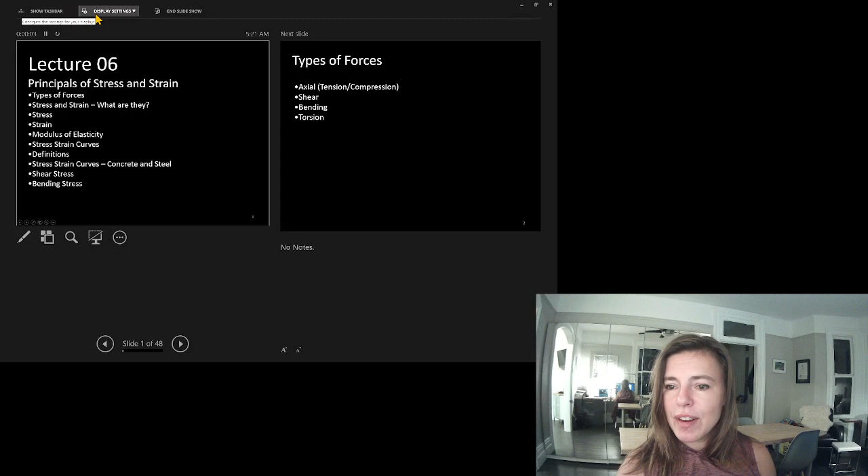Okay, so here is our lecture for today. It's the principles of stress and strain. I used to hate teaching this particular lecture. I always really struggled with trying to communicate these concepts, but over the years, it's turned into one of my favorite lectures to give, mostly because, especially when I gave it in person, I found the students really engaged. This is one that, in some ways, is the most intuitive and least intuitive simultaneously.

I'm also going to warn you that it is 5 a.m. and my kids hopefully stay asleep throughout the recording of this lecture. Because I still have to be in the city on Thursdays. I basically have to double down on my time. So my whole Thursday is still in the city being there, but I have to pre-record the lectures.

Okay, so today we're going to give a quick refresher on the types of forces, and then I'm going to introduce stress and strain to you. Like I said, in some ways they're very intuitive, and in some ways people struggle with them. So some of it is going to be me trying to find ways to talk about these issues and relate them to things that you do intuitively understand in your life, because you work with and experience stress and strain all the time. And in fact, they're terms that end up in the everyday lexicon that you don't even really realize are talking about these exact principles.

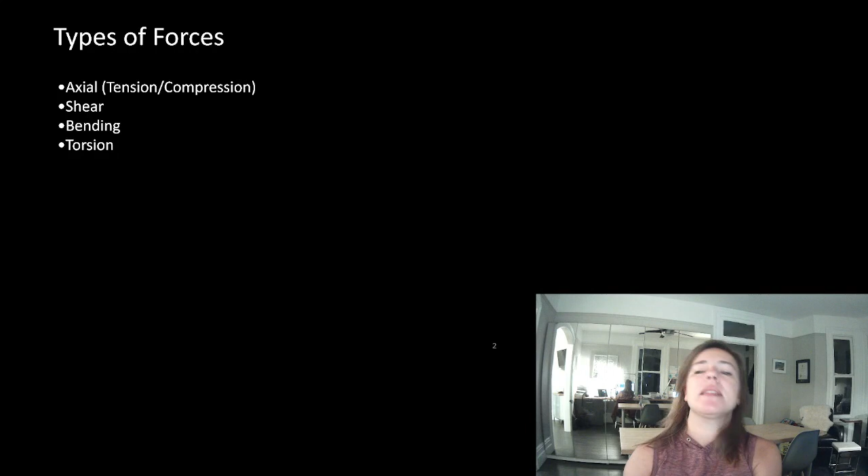Okay, let's, like we do often, refresh quickly the types of forces that we have. Remember, axial is compression, where we squish, and I'm showing you the little lines on my foam block, and then tension is where we pull. Tension is kind of hard to do with a foam block. It's maybe better with a hair elastic. We can stretch it out.

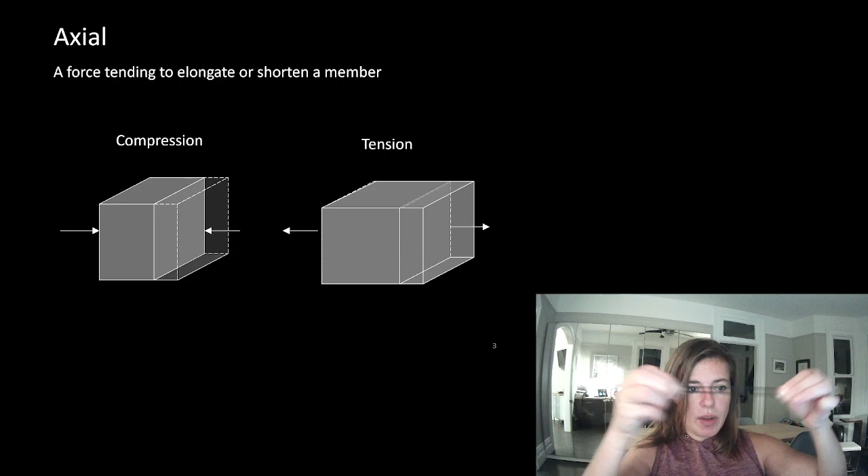Shear is the force acting in a direction parallel to a surface or a planar cross section of a body. Basically, if we have two planes and we slip them by each other, it's what's happening at that interface as we slip past each other right there.

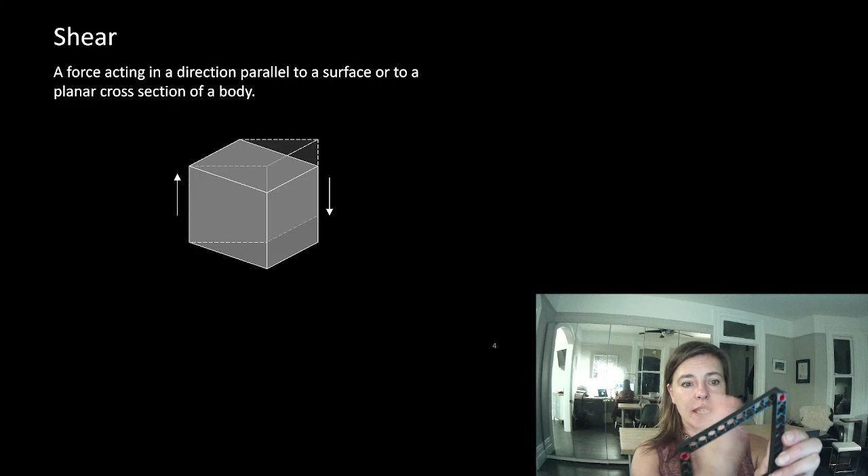If those two planes are far enough apart from each other, when we shift them relative to each other, we get a racking effect happening. Basically what we're saying is there's a series of infinite planes in between those two. As you can see, if we shear two planes far enough apart from each other, look at that—there's some force and some distance relative to each other. So as much as there's shear between these things, it's shifting relative to each other.

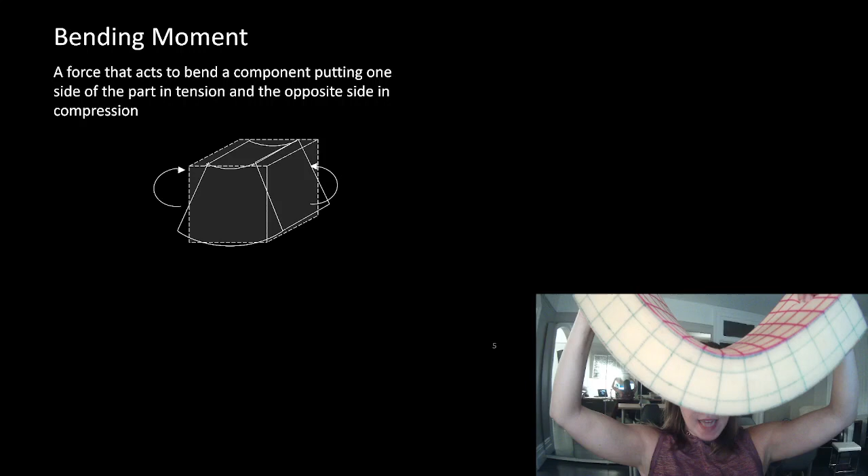Bending moment: when we bend something, it's putting one side in compression and one side in tension. You can see the top is kind of squishing there and the bottom is stretching.

If I bend it in the opposite direction, the top is stretching, which is tension, and the bottom is squishing, which is compression. So it seems like a lot of things, or at least bending, which we found quite complicated, can be related back to tension and compression.

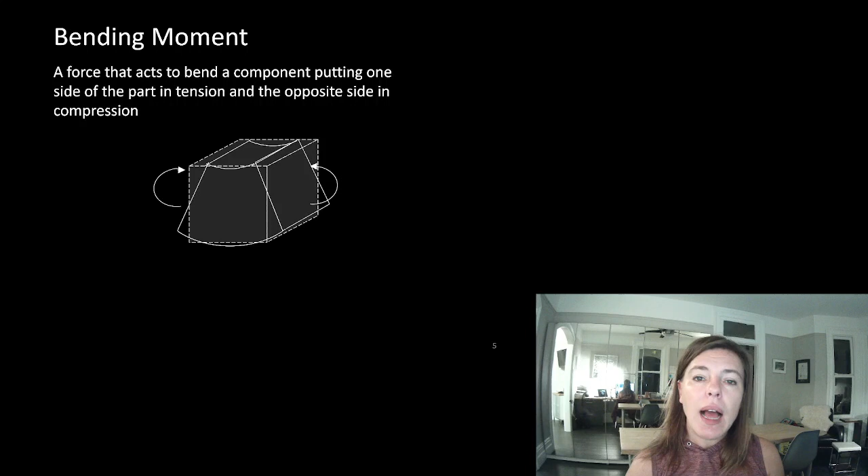Remember, we saw that when we talked about trusses. A truss and a beam, both of them could be in bending. For an element, a beam, we talked about that internal bending force. But for a truss, we broke it out into tension and compression components in the top and bottom chord of our truss.

Torsion, the one we don't really talk about very much, is the act of twisting, and it's kind of a funny combination of shear and moment. We're not going to spend any time going over that in this course. Okay, let's do a quick refresher on our units.

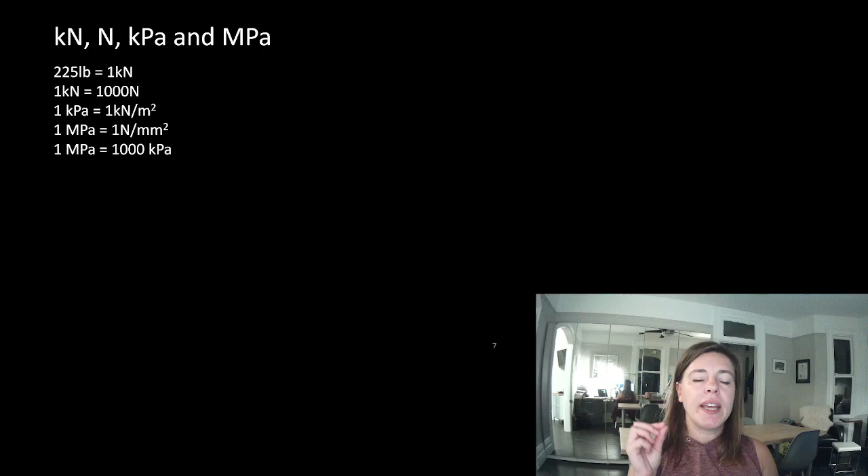So we talked about how 225 pounds is 1 kilonewton. For those of you that work in pounds, you can now get a sense of what 1 kilonewton is. 1 kilonewton is 1,000 newtons. Earlier in the term, we were always working in kilonewtons and meters. A lot of what we do today, we're going to work in newtons and millimeters. So instead of kilonewtons and meters, we're going to be working in newtons and millimeters. So we're going to need to be able to convert back and forth. Luckily, we have the beautiful metric system where everything is about multiplication or division of 1,000.

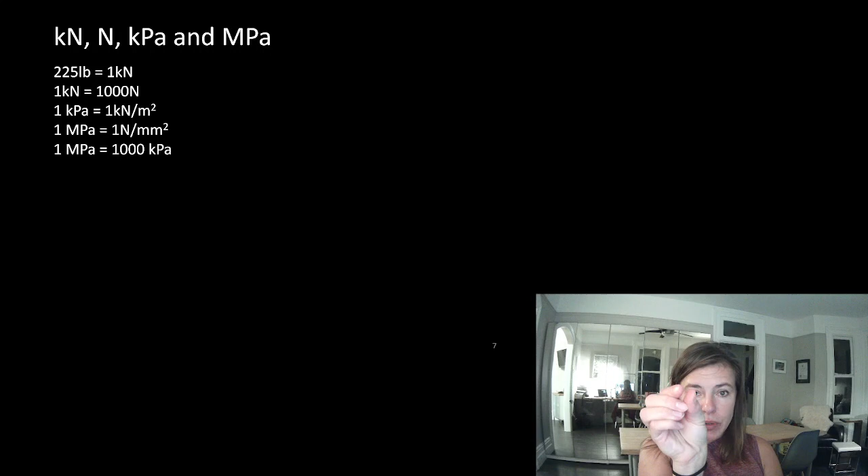1 kPa was 1 kilonewton per meter squared. So basically, for every 1 meter by 1 meter area, we had 1 kilonewton of force acting on it. MPa is 1 newton per millimeter squared. So every 1 millimeter by 1 millimeter square has 1 newton on it. So that means MPa and kPa can be related. If we wanted to switch from MPa to kPa, for 1 MPa we are dividing by 1,000 to switch newtons to kilonewtons, but then multiplying by 1,000 and 1,000 to switch to meters squared. So 1 MPa is the same as 1,000 kPa.

Strength. You guys remember, this is what we spent the first few lectures talking about. We want to make sure that the factored load is less than the reduced capacity. And we say less than, but that less than can be pretty darn close to exactly equal. So we'll often say equal is the same as less than.

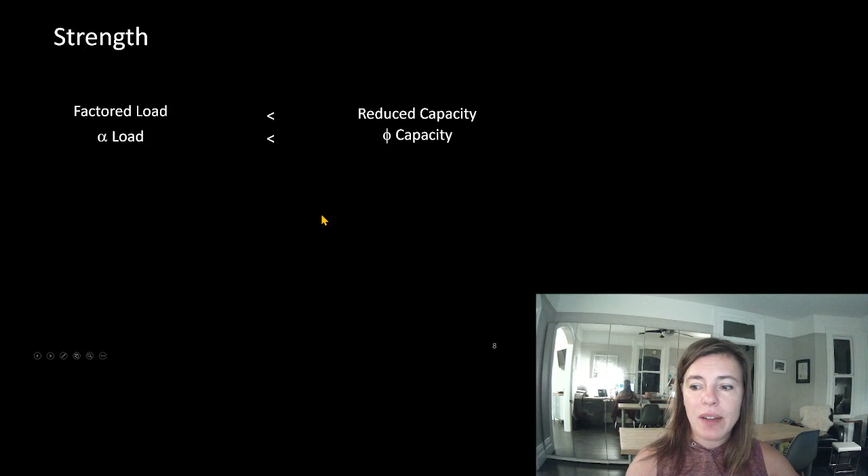We'll often use these symbols to represent the fact that we factored the load or reduced the capacity. We haven't really looked at it much when we were factoring it. If you remember, I had that chart showing what the different factors were. In the building code, they used this symbol to talk about what the factors were. In this part of the course, where we spend time talking about the reduced capacity, this little symbol is going to be important to us. We're going to look for this symbol to see how much we reduce the capacity of different materials.

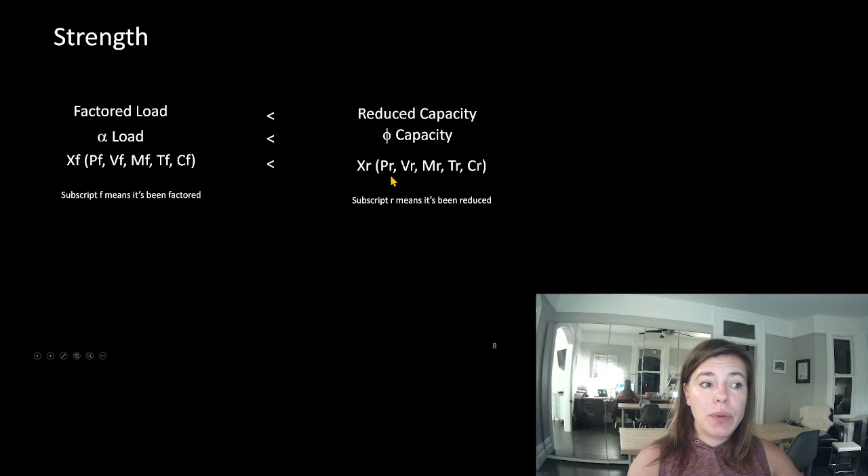When we were talking about the actual forces, we would use a little subscript F to remind ourselves that we were talking about a factored load. So if you came to me and said, here's the load, if it didn't have the subscript F, I would know I needed to factor it. If it had the little subscript F, I would know you've already factored it. And that happens a lot. A lot of times in offices, people will do one part of the problem or figure out the loads for the whole building and then pass it on to another person. So knowing if that little subscript F has already been applied is very important. The little subscript R means that the capacity has been reduced. And again, it's the same thing - has that already been incorporated?

Okay, here's where we start talking about the new part of the term.

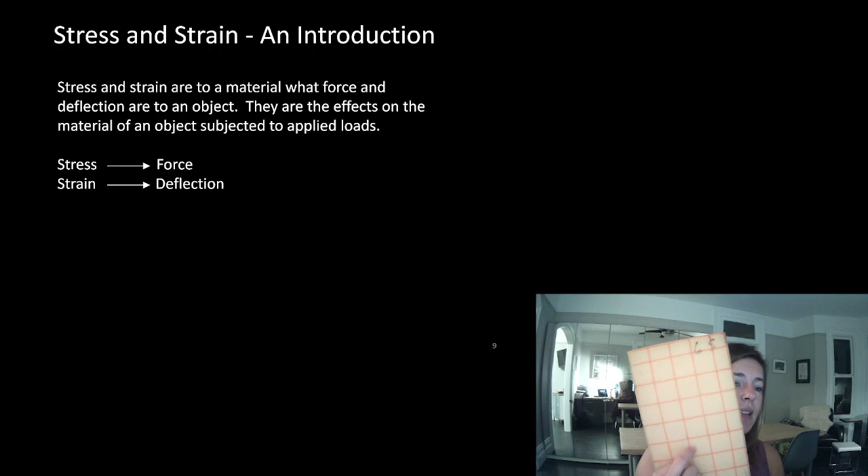Stress and strain. So stress and strain are to the material what force and deflection are to an object. They are the effects on the material of an object subject to applied loads. What does that mean? If this was our object, we were applying a force to it. And now I want to talk about what happens to one tiny little block of it. So we applied a force, it deflected, so we had a force with a deflection, and now we're going to talk about what that means for stress and strain on this little cube of that object that has the force with a deflection on it.

So it's easiest to work with axial forces, so we're going to start there. So stress versus force - if we have an object with force on it, we are talking about one unit area of material with stress on it. So we were talking about objects. Now we're going to break it out and just talk about this little tiny block of the material. Basically, forget about the object as a whole - what does it do to the little tiny basic bit of element? So if there's force on the object, we're talking about the stress in the material.

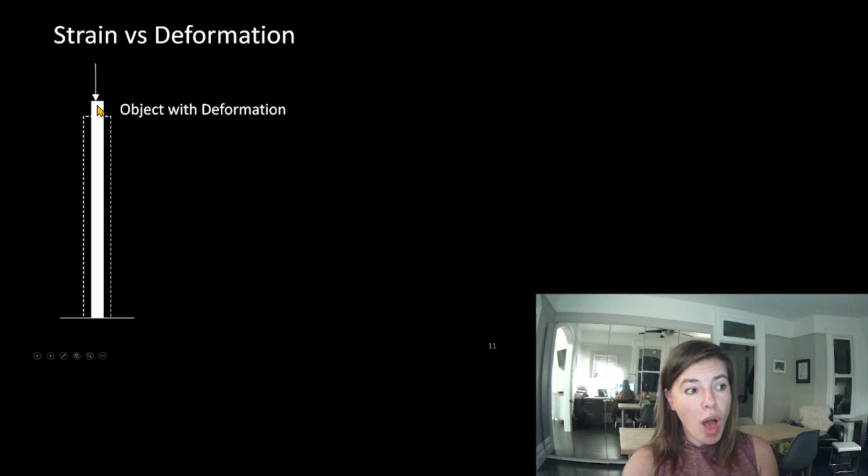If we're talking about an object with deformation, forget that there is a force causing that deformation. We know there must be a force there, but that's kind of irrelevant to us at the moment. We have an object with deformation. We're talking about the strain on the material object. So if you hear deformation, think strain. If you hear force, think stress.

Now you can see though that this deformation is caused by a force. So there's probably gonna be some way to equate those two things. And that's gonna come later in the term.

Okay, let's talk about stress. Stress is defined as force per unit area. You're gonna see it's very similar to the load we applied to things because that was a force over an area. Remember when we were talking about kPa and we had 1 kilonewton over 1 meter by 1 meter squared, that was 1 kPa, or we had a force divided by an area.

Well, that was our overall object, and we talked about things a lot in kPa. We're now going to be talking about the unit material object, or a tiny little object. And so we're going to refer to it in newtons and millimeters squared. But we're still talking about a force and an area. So if we have that force over a particular area, we can determine the stress.

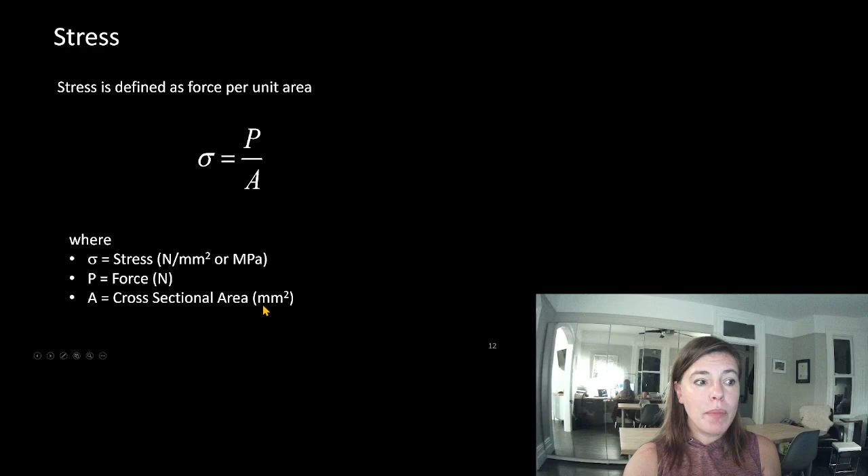So stress, we want it to be in newtons per millimeter squared, or MPa. That means our force needs to be in newtons. Remember, we had things in kilonewtons when we were talking about our force. So we would want that to be 1,000 newtons instead of 1 kilonewton. And our cross-sectional area, instead of 1 meter by 1 meter squared, we would be talking about 1,000 times 1,000 millimeters squared instead.

So let's see what that looks like as an illustration. If we have this area with this force P on it, it is the same thing as that force spread evenly all over that area, or force divided by area. You know how I've often talked about my load as if I was spread evenly over the table. Well, what we were really talking about is a force spread over an area. So this is P divided by A. So this is our stress.

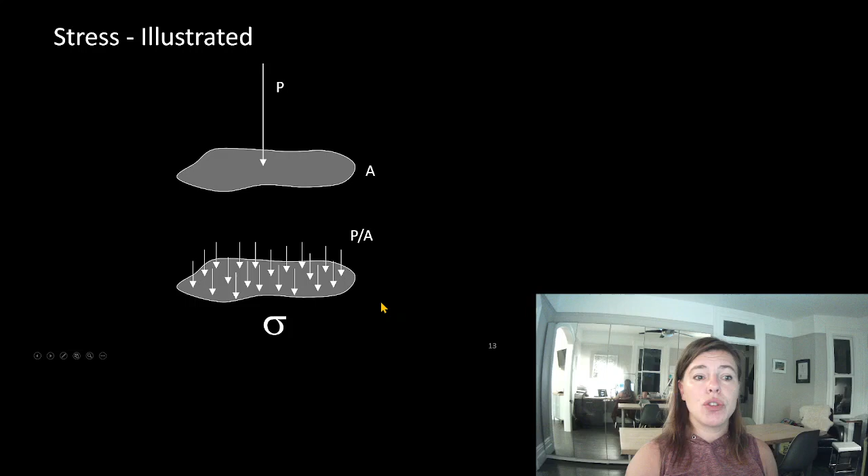Okay, so let's take that one and set it aside. Is there more or less or the same stress if we have the same force over a smaller area? People tend to get very nervous when we're talking about stress and strain, but you still do intuitively understand this thing. If you have your entire weight on both feet, you have a certain amount of stress you're exerting on the floor. What if you lifted 1 foot up? So you cut your area in half. Does the stress you exert now on that area below 1 foot, do you think that's more or less than the stress of both feet? Try it. Stand up. I'm going to try it myself.

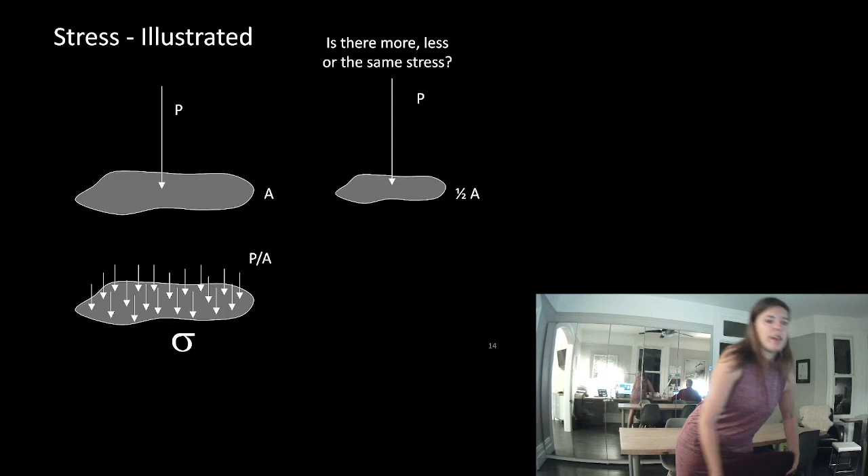I'm going to stand up, and you can't see my feet, but I've got all of my load spread over 2 feet. When I lift 1 foot up, if I was standing on a mattress, for example, I would sink down just a little bit lower. Sink down, that sounds a bit like deformation and strain, but we just want to talk about force. It's a good indication that I have more stress in that spot. So yes, for those of you who said there should be more stress here, let's take a look. We have the same force divided by half the area. Well, that's 2 times the stress, or we've doubled the stress. So again, just try to take a second and intuitively think about these things before you start your calculations.

Okay, we have our force divided by our area, and we have stress. Is there more or less or the same stress if we have half the load on half the area? Well, if we only took half of our weight and put it on 1 foot, that should be fairly similar to our whole weight over on 2 different feet. So for those of you that think this is the same, let's take a look. We have half the force divided by half the area. The halves cancel out. We have the same stress. So this is why stress is really handy, because we can break it down into unit components so easily. We can talk about what's happening at the material level very easily. So these are equal to each other.

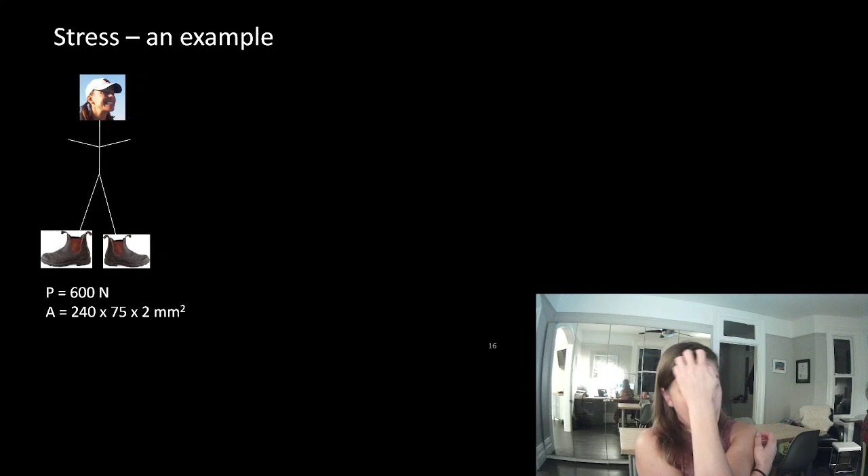So let's take a quick look at an example. Here I am. I weigh 600 newtons, and I've measured the area of the bottom of my Blundstones: 240 millimeters long by 75 millimeters wide, almost 10 inches by about 3 inches. And I've got 2 feet. So that 600 newtons is, remember, stress is force divided by area.

So my stress on the ground, let's take a look: 600 divided by 240 times 75 times 2. Plugged in there, that equals 0.0167 MPa. All right, so that gives us some information.

We have zero clue of the scale of what that means yet. Loads we could kind of get our head around, but stress is less intuitive. This gives us a number but no intuitive feeling. Remember, newtons and kilonewtons, MPa and kPa, just differ by 1,000 units. So if this was kPa, it'd be 1, 2, 3 - I'd be exerting 16.7 kPa of stress on the ground directly under my feet.

Now, if I went and put heels on - I'm feeling fancy, so I've taken off my Blundstones and put on a pair of heels - do you intuitively think there is more or less stress exerted on the ground?

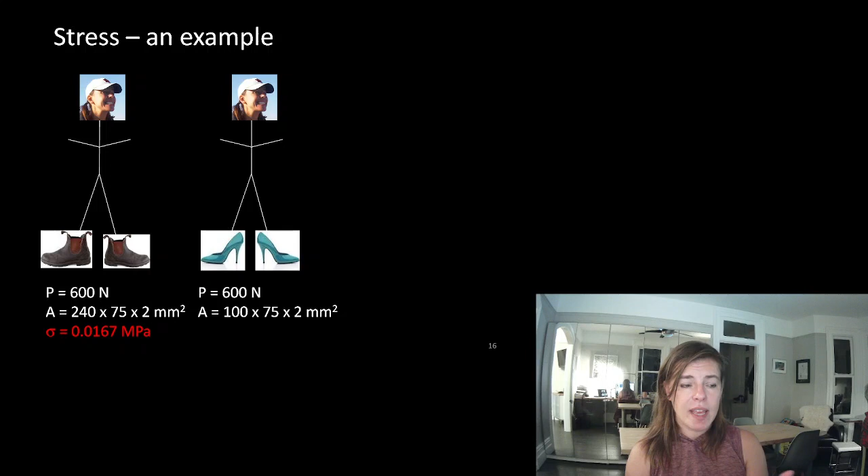Now, I'm going to assume that most of the load is on the front part of my heels. For any of you who have worn heels at a wedding or prom and tried to walk across grass, you try to stay on your toes, because if you put your weight on your heel, you go right through the grass. That's because there's a lower area there, and you're putting more stress on it, or the same force on a smaller area.

So if I have just my weight on the toes of my heels, just this part right here, let's take a look - do you think there is more or less stress exerted on the ground? Well, we have 600 newtons. My weight hasn't changed, but I've got a smaller surface area now. So we've got 600 divided by 100 times 75 times 2. We're going to get 0.04 MPa of stress, a higher stress. And that makes sense - we've got a smaller surface area but the same load.

Now I go and grab my snowshoes instead of my Blundstones or my heels. I've got 600 newtons, the same load, over a much larger surface area. My snowshoes are 1 meter by 150 millimeters wide. So now, intuitively, what do you think - more or less stress? Probably you understand there should be much less surface stress between my feet and the ground now. And that's exactly why we use snowshoes, because snow can handle a much lower stress.

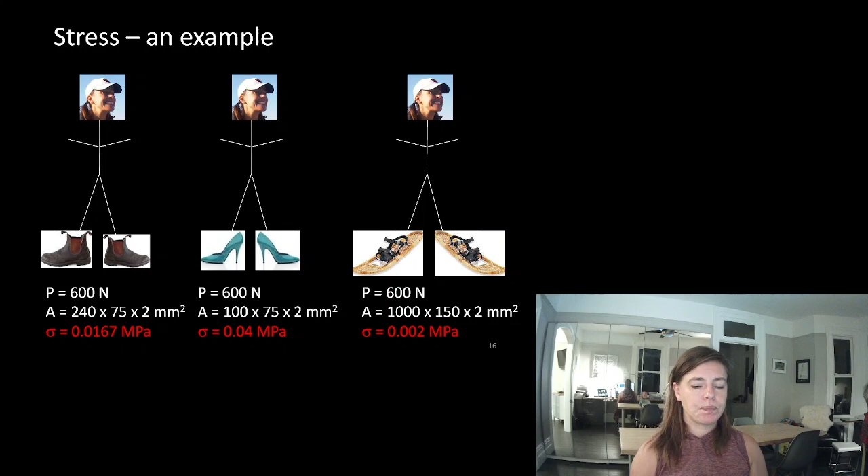All right, let's do another example. What is the stress an elephant exerts on a floor if it weighs 44 kilonewtons and its feet are approximately 500 millimeters in diameter? I don't think I'm going to put the calculation sheet down for this - I think this one's pretty easy. We can talk it through.

Well, we know we want to switch those kilonewtons into newtons. When we're talking about stress, we want to be in newtons and millimeters. So 44 times 1,000 equals 44,000 newtons. Okay? For area, we have 4 feet of our elephant.

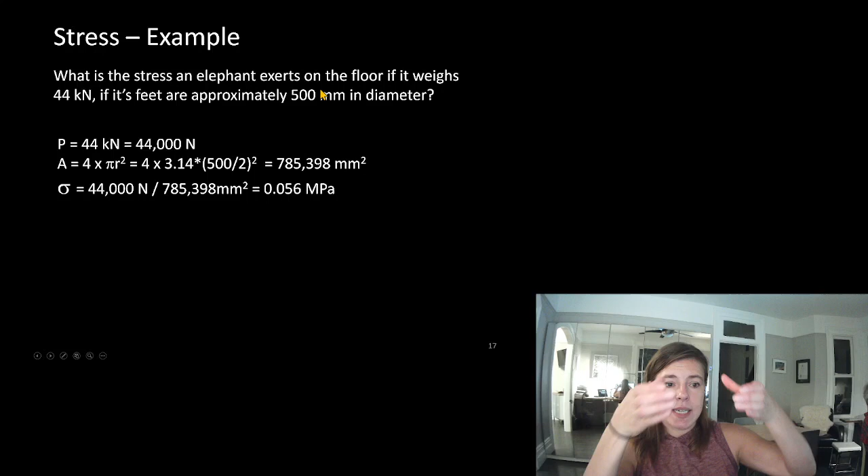Its feet are approximately half a meter around in diameter, or 4 feet times pi r squared. Our r is 500 divided by 2. Remember, r is radius, which is half of the diameter. So it's 4 times 3.14 times 500 divided by 2, squared.

We get 785,398 millimeters squared. So we have a force and an area in newtons and millimeters squared. We can calculate the stress the elephant exerts on the floor: 44,000 newtons divided by 785,398 millimeters squared, and we get 0.056 MPa.

Me in heels was 0.04 MPa. So I exert the same stress as an elephant? That seems kind of insulting to me. But this is why understanding what the area is is very important. You want to be talking about the same thing here to understand what stress means.

What if the elephant snuck into my closet and stole 2 pairs of heels? So instead of its load being on 500 millimeters in diameter on all 4 feet, it tried to jam each foot into my heels. So that sneaky elephant is now wearing my best pair of heels and my second best pair of heels. Let's see what that is. It's got 4 feet, and my heels were 100 by 75, so we have 100 times 75 times 4 feet, so we have 30,000 millimeters squared.

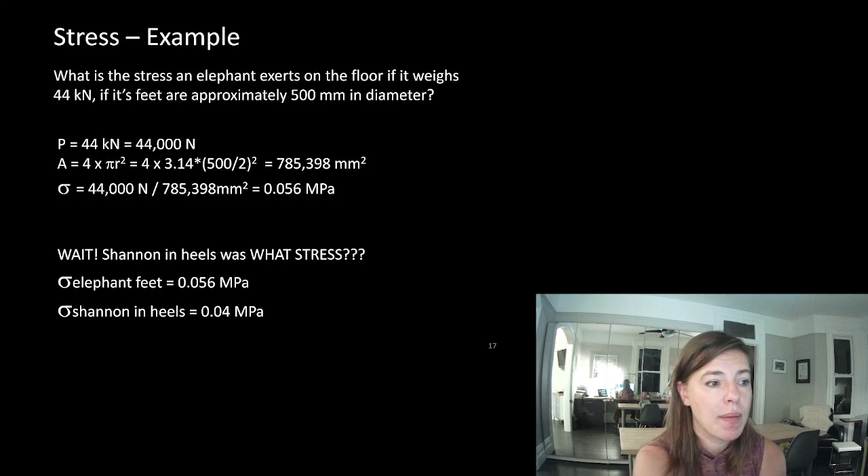Well, let's relate this to something that's slightly more handy for talking about buildings. What if I said steel can support around 350 MPa of stress? You don't know where that came from, you don't know what that means. But if I said that snow can exert...

0.01 MPa of stress, and that's why we needed the snowshoes, you kind of get what I'm talking about. So I'm just flat out telling you we're talking about a material that happens to be steel that can support 350 MPa of stress. It has the ability to not fail if it's supporting anything up to 350 MPa of stress. Over that, it's ruined. We don't know what that means or where it came from, but I'm telling you this is the material we're talking about right now.

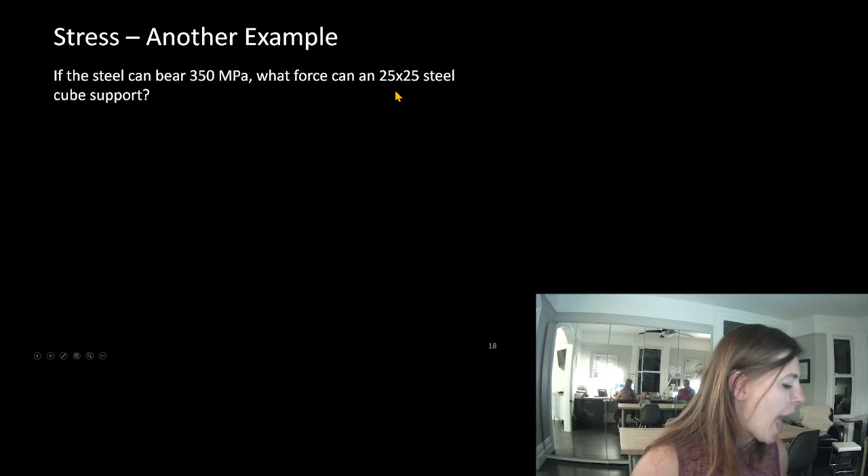And we have a 1 inch by 1 inch cube of it, so we have 25 by 25 millimeters of steel. I am going to add the fact that it's supposed to be millimeters into that slide, slide 18. I'm going to add in the millimeters into that note, just so you guys are really seeing that we're talking about a 25 millimeter by 25 millimeter cube.

Okay, we want to know what force it can take, though. We've been told what the stress capacity is: it's 350 MPa. Area, no problem, we can figure that out. It's 25 by 25 millimeters, or 625 millimeters squared.

We know that stress equals force divided by area. Now it's a simple matter of rearranging this. We can take our stress and multiply it by area to figure out what force that can take. So 350 times 625 millimeters squared gives us 218,750 newtons.

Well, great, we were dealing with stress, so we wanted everything in newtons and millimeters. But once we're talking about force again, we're kind of lazy and we like to talk about things in kilonewtons. So now we're going to switch it back to kilonewtons. I know, it is so hard to multiply and divide by 1,000, but that's exactly what we're going to do. We're going to divide this by 1,000 to talk about it in kilonewtons, and we can see that we have 218.7 kilonewtons. So a 1 inch by 1 inch cube of steel can support 218.7 kilonewtons, assuming it can take 350 MPa of stress.

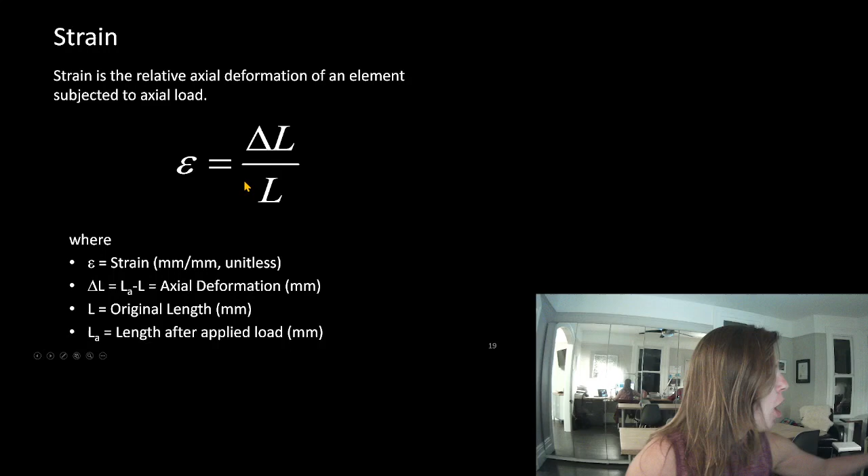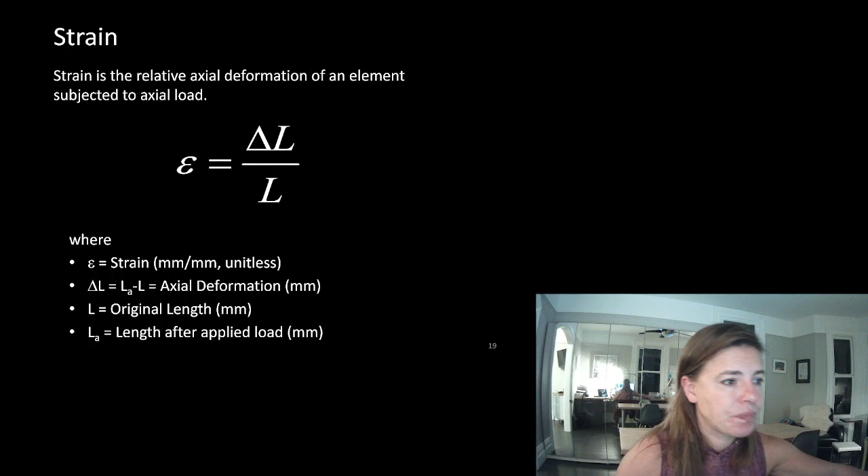So strain is a dimension divided by a dimension. It's unitless, which really messes with people's heads. I find it's often handy when I'm talking about strain to just remind myself where I'm coming from. Even though it's unitless, it's millimeters divided by millimeters, I'll often find it handy to just keep track of my units off to the side, and I'll write millimeters divided by millimeters just so I don't lose track of things. It can be very handy.

So we also want to know what the change in length is. That is the length after the load's been applied minus the original length. And that is our axial deformation. So this is how much has it changed? We have the final length minus the original length. Or really, it's the final length minus the original length divided by the original length.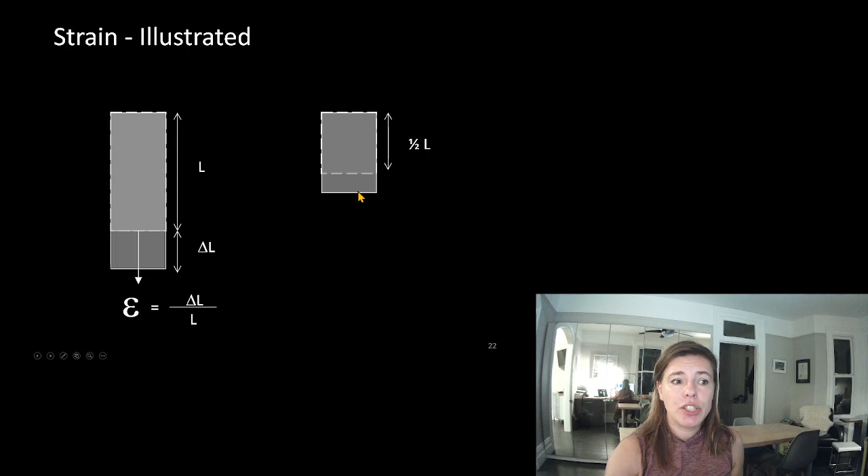Let's look at another one. We have half the original length, but only half of the amount of deformation. So half of the change in length, but we have half of the original length. We're going to have the same amount of strain.

Let's look at an example.

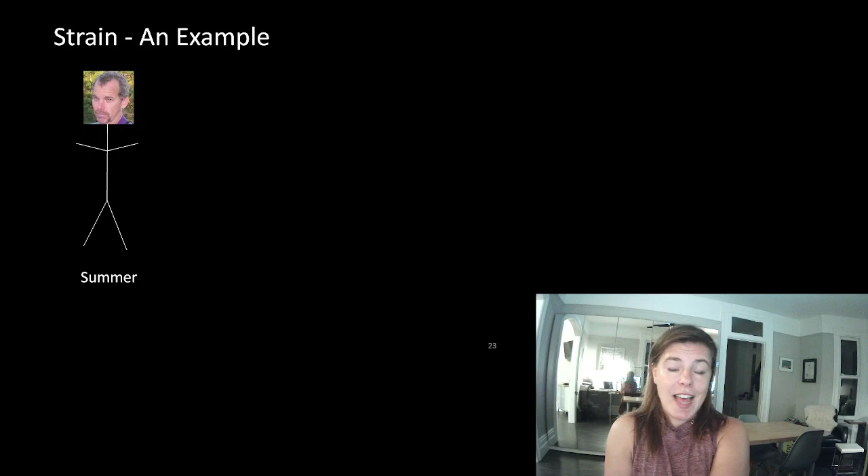Here's Dave. Say hi, Dave. This is much more fun for me now that he's sitting beside me. Usually this was done and people hadn't met him yet. Here's Dave one time with a fantastic mustache. And it was in the summer. And Dave was fit. Dave was in great shape. He had been working out. He had been lifting lots of heavy things outside.

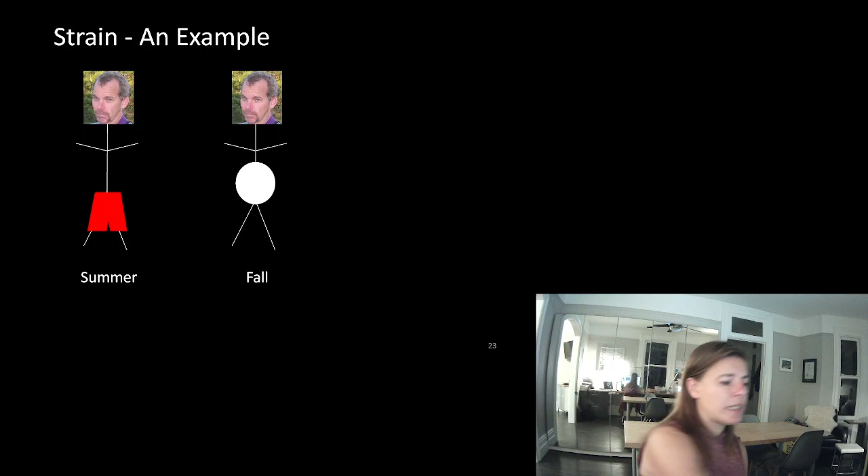And he puts on his shorts, and the elastic fits perfectly around his waist. It's exactly the right fit. He needs absolutely nothing to hold those shorts up. So his shorts are the exact perfect fit. But fall comes along. There's lots of events, Halloween candy, so much Halloween candy. That reminds me, I'm going to take a drink of my coffee. And those shorts are starting to get a little bit snug. So he pulls his shorts up, and that elastic is stretching just a little bit. So there's a little bit of stretch in that elastic around his shorts.

And then January. Whew, after the holidays, lots of beer, lots of turkey, lots of eggnog, lots of chocolate. And Dave goes to put on those same shorts, and man oh man, is he ever stretching or straining the elastic on those shorts. So this is where intuitively I think you understand. For all of these examples, when he's got the shorts in his hands just before he puts them on, they all have an original length. The original length is the exact same no matter what. That's the elastic band in his shorts.

In the summer, when he puts those shorts on, there is no change. There is no delta, so there is no strain at all. Zero strain on that elastic.

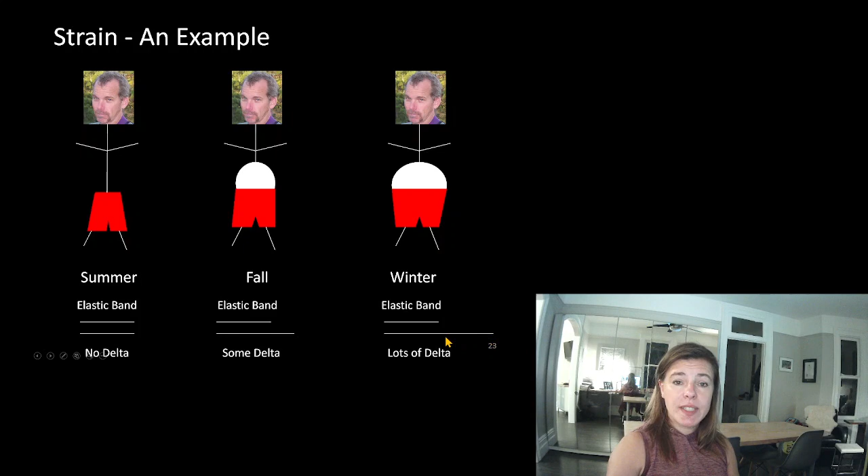In the fall, there's some delta, some stretch, some change in length, even though they all have the same original length. So there's some strain here. In the winter, there's lots of stretch in that elastic, lots of delta, so there's lots of strain in that elastic.

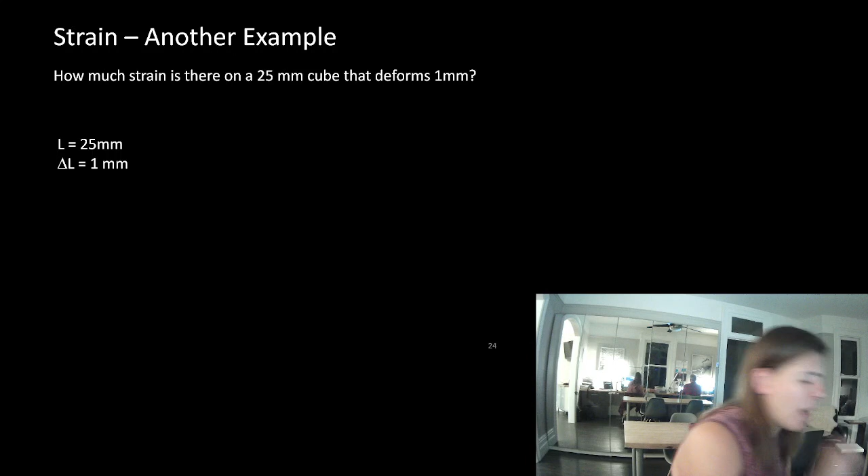Intuitively, I think now you kind of understand what we're talking about. We're going to bring it back to objects that maybe are a little bit harder to talk about. I'm trying to decide if I want to turn the page down for you guys. Okay, these are still pretty easy examples, I don't think I need to work out the calculations by hand.

So we have an object that is 25 millimeters tall, so we're talking about 1 inch tall. Remember how in the other one we had a surface area that was 25 by 25? Well, now I'm talking about one that is 25 millimeters tall. And we've been told it deforms 1 millimeter.

We don't know what load was put on it. We don't know what happened to do this, but we know that it was 25 millimeters tall and now it's changed by 1 millimeter. Now, some of you are asking, did it stretch or did it compress? Answer is, I don't know. They've just told us that it's 1 millimeter. I don't know what's happened there. They didn't give us that information. They've only told us that it deforms 1 millimeter.

So we have 25 millimeters of original length, and we have a change in length of 1 millimeter. So what's the strain? Strain is change in length divided by original length, and we have 1 millimeter divided by 25 millimeters, or 0.04. Unitless strain. Sometimes I'll write millimeters divided by millimeters just to kind of help myself keep track of that.

So why do we use the original length when we're talking about strain? Why don't we use the final length? Well, there's two reasons. One is that the difference is very, very tiny. But the other one is it makes it easier to not worry about whether it is stretching or compressing. All of a sudden, if it's stretching or compressing becomes really, really important.

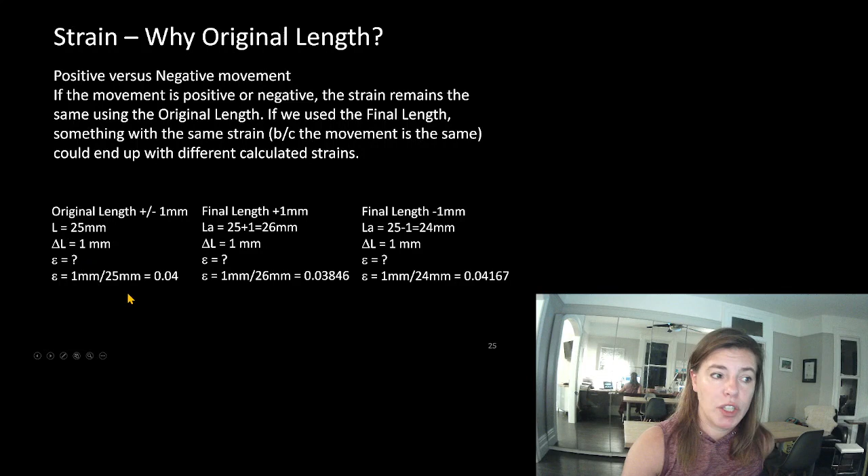All right, you understand all of this. You know what stress is, you know what strain is. Why do we care about this unit element? Why don't we just talk about it in force and deflection? Why the heck would we bother with this at a material level?

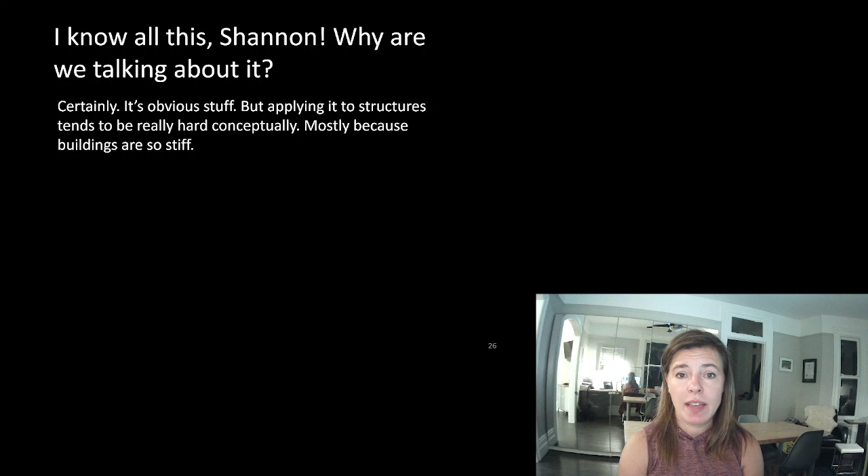We need a way to be able to talk about these things or do all of the tests to figure out how these things behave in a lab. We need to know how to figure this out in a lab and then extrapolate and apply it to a building as a whole. And that's why talking about things in stress and strain is so important, because now we can talk about things at a material level and then extrapolate it to the building as a whole.

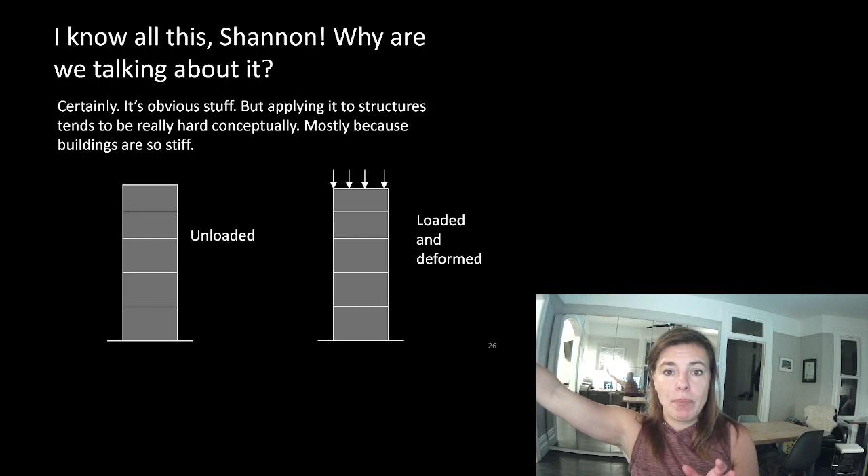So the part behaves like the whole. It's really hard to test full-scale elements. Knowing the part of it behaves like the whole, we only need to test these little tiny bits of it to understand the material. So often, for example, if it was steel, we'd test a coupon or a dog bone sample. If it was an axial load, we'd stretch this, measure the deformation, and measure when it failed. Then we could calculate what the stress and strain are, and extrapolate that and apply it to whatever members we actually have.

So what are the exceptions to this rule? These make sense most of the time. When do these rules stop making sense? Well, when we have phase changes, when we go directly from a solid to a gas or even some stage in between. So let's say an ice hotel evaporates, for example. That's sublimation. The normal rules are not applying in that example.

Extreme temperatures. Steel in a fire, for example, and steel is very susceptible to high heat. The normal rules we're about to start to talk about for steel don't apply. It is experiencing different rules, the rules are changing for how steel behaves under very high heat.

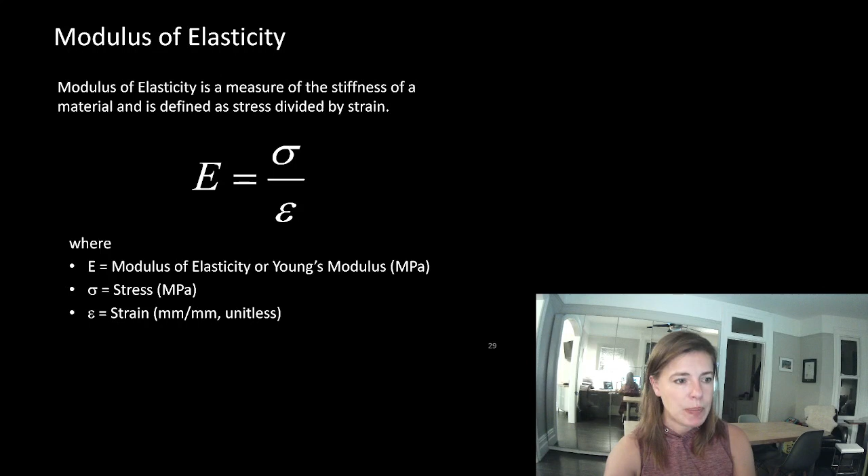So let's take a look. If we know that E, the modulus of elasticity, is just something we're creating to relate stress and strain, we have stress divided by strain. But if we know that stress is force divided by area and strain is delta L divided by L, we're just saying E is this measurement or value, stress divided by strain, we can figure out a bunch of things. E then would be stress divided by strain, or we can rework this and clean it up a little bit: E is force times length divided by change in length times area.

So all of a sudden, we have our force, we have our length, we have our change in length, and we have our area. So now there's this relationship between that unknown, what was causing that deformation for strain, related to our stress. And that relationship is E, our modulus of elasticity. We're going to see what that looks like - we're going to plot some of those out in just a minute.

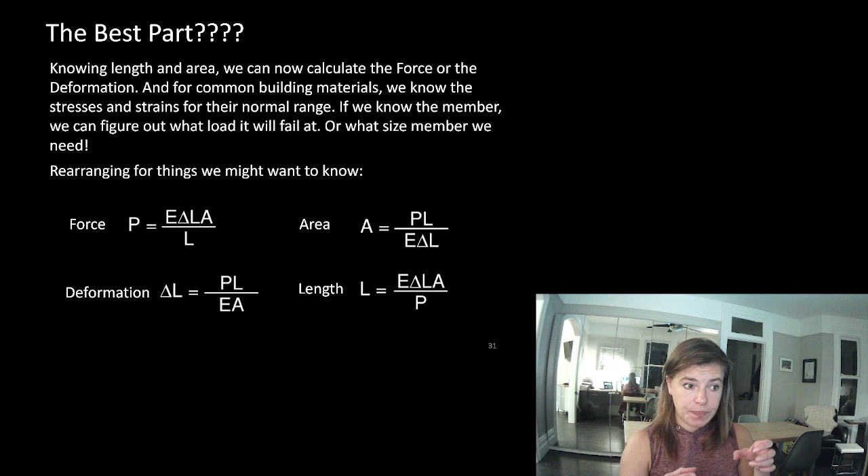If we know length and area, we can calculate the force or the deformation. For common building materials, we know the stresses and strains in their normal ranges. We can take coupons, dog bones, cylinders, or cubes of material and test them again and again to figure out what stresses or strains they fail at. If we know what member we have, what length we're using, what load is being applied, or the cross-sectional area of the material, we can figure out things about our material or member.

If we know the modulus of elasticity of our material, remember it can be figured out by testing small elements to determine the stress and strain on that material, which tells us how it behaves. So if we know E, how much deformation we're going to get, our cross-sectional area, and our length, we could figure out the force on this object. This might seem like a stretch until I show you this relationship. We'll start with a few quick examples, then look at that relationship to tie it all together.

We like talking about things in stress and strain because we can test it at a unit element. Stress divided by strain is MPa divided by a unitless element, so our E, or modulus of elasticity, is also in MPa.

People have, over the years, tested lots of elements, and we know their modulus of elasticity. Structural steel is 200,000 MPa - that's the only one I want you to memorize. You should know that steel has a modulus of elasticity of 200,000 MPa. If we were all in person, I'd make you say it aloud, and randomly ask for the rest of the term. I can guarantee you need to know this. Steel, E equals 200,000 MPa.

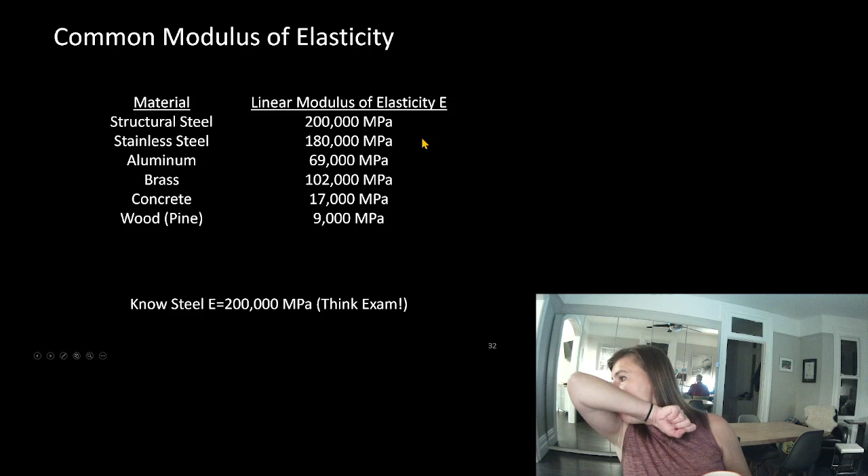Again, this doesn't mean much to you guys. What can we do with these things, Shannon? Well, let's start looking at some examples.

Let's take a look at our steel cube, 1 millimeter by 1 millimeter by 1 millimeter. That's a good size to talk about, but I use 25 millimeters because that's about an inch, and old school people talk in inches and pounds and pound force. We're going to work in everything metric, so we'll use a 25 millimeter by 25 millimeter by 25 millimeter cube.

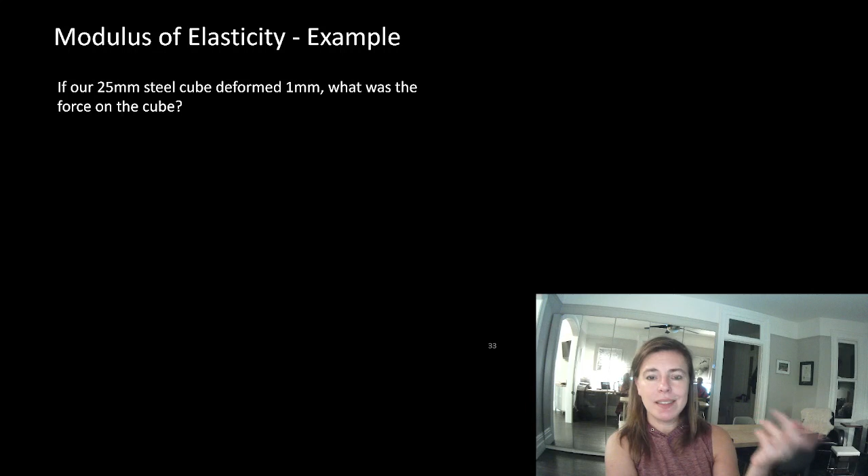We've been told this cube deforms 1 millimeter. What was the force on that cube? We know its original length was 25 millimeters - we don't care whether it's compression or tension, it's deforming 1 millimeter, so we know our change in length. We know our surface area was 25 by 25 millimeters, so 625 millimeters squared. And we know E because it's steel - somebody has tested this again and again and told us it's 200,000 MPa. The only thing we don't know is what the force was.

We know the original length was 25 millimeters, the change in length was 1 millimeter, the area is 25 by 25 or 625 millimeters squared, and E for steel is 200,000 MPa. Well, the force - E equals force times original length divided by... oh look at that, I've got an error in that slide too.

Slide 33. We're missing the delta L. That should be delta L times the area, or 200,000 equals P times 25, or original length, divided by our change in length times our area.

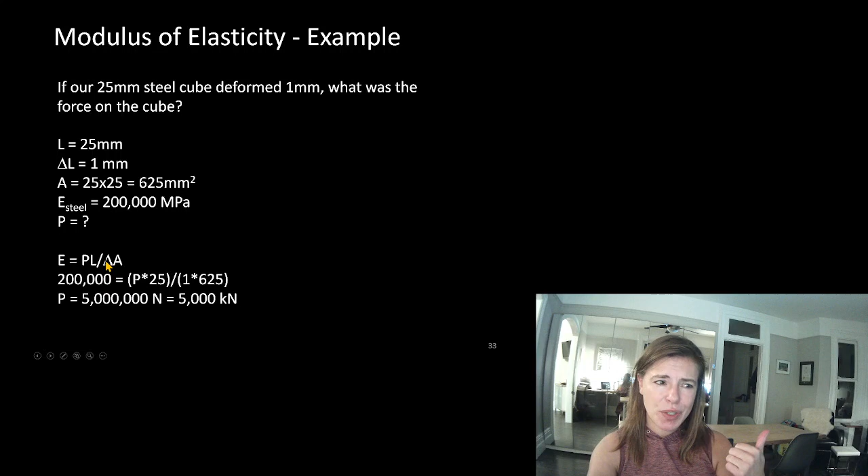We could rearrange this first. Remember I showed you those equations where we could actually rearrange this? I just wanted to show you that you could rearrange it with the numbers or after the numbers have been inserted. It doesn't matter what way you like to do it.

Our force is 5 million newtons? What the heck? That is huge. This is why once we're talking about the force, we like to switch it back into kilonewtons. I know, it's a pain in the butt that when we're talking about stress and strain, we work with MPa or newtons and millimeters, and then once we're talking about the final thing, we're working in kilonewtons and meters. So we're going to switch this into kilonewtons, a slightly more reasonable number of 5,000 kilonewtons.

But that's still 5,000 Arnolds. So we have this object that has 5,000 kilonewtons on it, causing that 1 millimeter of deformation. Now, how many kilonewtons did we say that 25 millimeter by 25 millimeter cube of steel could take? Yeah, it was only 218 kilonewtons, I think. So it looks like this would actually fail that object.

It doesn't seem like if we knew how much stress a steel object could actually take, that this could even be possible. But that seems a bit beyond what we're talking about right now. We don't really know where that comes from, but I'm telling you that this couldn't work because we already did a calculation that if steel can only take 350 MPa, we couldn't get this much deformation.

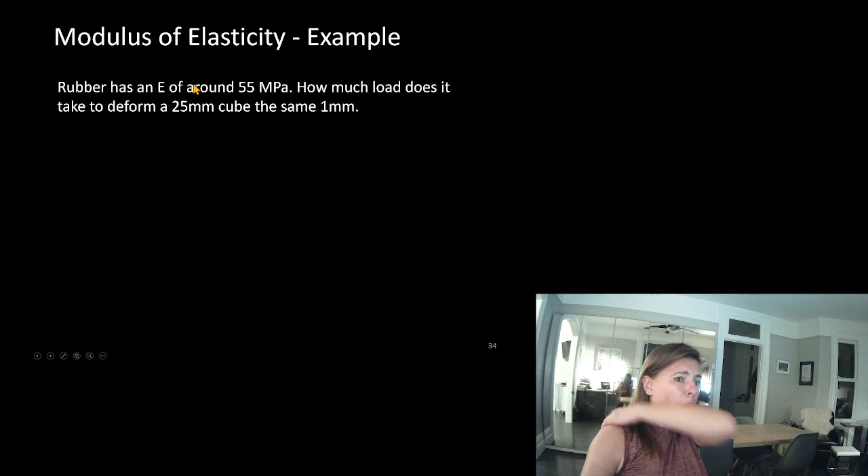All right. What if we had rubber, which has an E of 55 MPa? And I can tell you everything that I've talked about in this lecture, I've actually looked up. An average weight of an elephant is around 44 kilonewtons. The diameter of an elephant's foot is around half a meter. The E of rubber, if you're talking about particular rubbers, is around 55 MPa.

So how much load does it take to deform a 25 millimeter cube? The same 1 millimeter deformation on a 25 by 25 by 25 millimeter cube. Do you think it's going to take more or less force to deform this cube the same amount? Just intuitively think about it. If you took a cube of steel and a cube of your eraser and squished it, do you think you'd see the deformation in the steel? No. Would you see the deformation in the eraser? Probably, yeah. So it seems like it should take much less force to deform that same cube 1 millimeter if it has a lower modulus of elasticity.

So let's take a look. We know that it is 25 millimeters long, that's its original length. Its change in length is 1 millimeter, that hasn't changed. We know its area is 625 millimeters squared, that's the same. The only thing that's different is the stiffness of the material, or the modulus of elasticity, or the E of the material. And this has come from all kinds of tests that they've been able to tell us the value of that is 55 MPa.

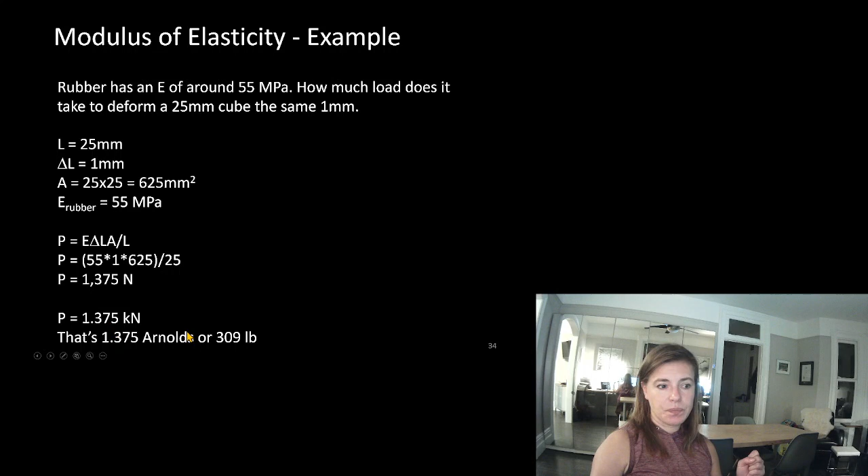1,375 newtons. That's a pain in the butt. We like to talk about it in kilonewtons, or 1.375 kilonewtons. That's around 309 pounds. So it takes much less force to deform that piece of rubber, that same size piece of rubber, than it does to deform the steel object.

All right. Let's look at the stress-strain curve of these objects. So stress-strain curves describe the behavior of a material under a wide range of stresses. Essentially what someone has done is for a lot of different materials, they've said, okay, I've got this little object and I'm going to put a very little amount of force on it. How much did it deform? I'm going to put a bit more force on it. How much did it deform?

I'm going to put more force on it. How much did it deform? They kept doing that all the way up until the object failed completely. They destroyed the object. And then they plotted those points relative to each other.

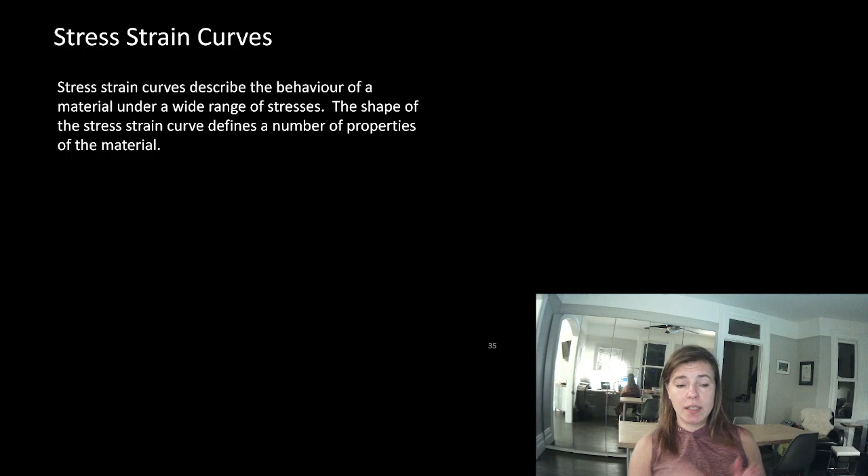They put the strain on the bottom and the stress upwards. So the strain is our horizontal axis and our stress is our vertical axis. And they've plotted all of those out.

E is the relationship between those two things, the force divided by the strain, or the stress divided by the strain, is E. So we are plotting the E of the object. We care about E when it's in this nice, beautiful, flat, even part of the stress strain curve. We're going to see what I mean by that in a minute.

So before we talk about that, let's talk about some useful terms engineers should know, and some of them that you should too, because they're pretty handy. Most of them are ones you kind of know and you use all the time, and really, this is where they're coming from.

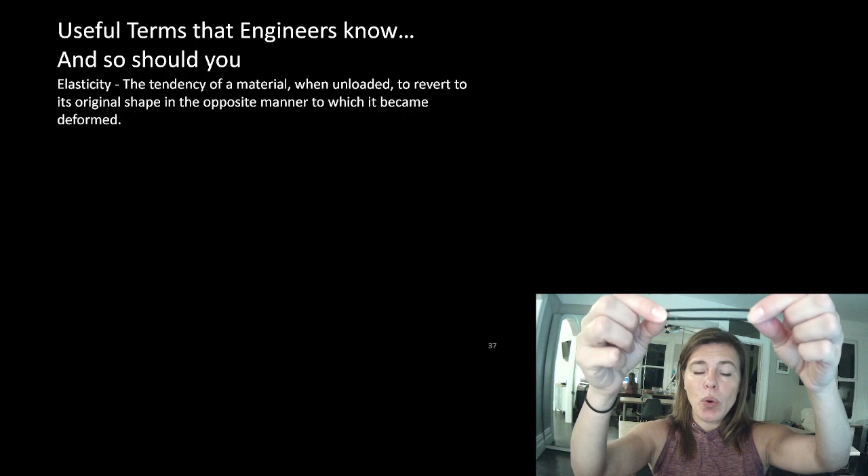Elasticity: that's the tendency of a material when unloaded to revert to its original shape in the opposite manner to which it became deformed. Literally, an elastic. If I put a force on this object and I strain it, there is some deformation. When I let go, it goes back to its original shape. There is no permanent deformation in that elastic. I've strained it, and it goes back to its original shape. There is no permanent deformation.

Plasticity: the deformation of a material undergoing non-reversible changes of shape in response to applied loads. This one's a little bit harder to talk about. But if you can, go find a paperclip. Pause me and go find a paperclip. A paperclip is a really good object to try to demonstrate elasticity and plasticity. So if I have a paperclip, this is in its original shape.

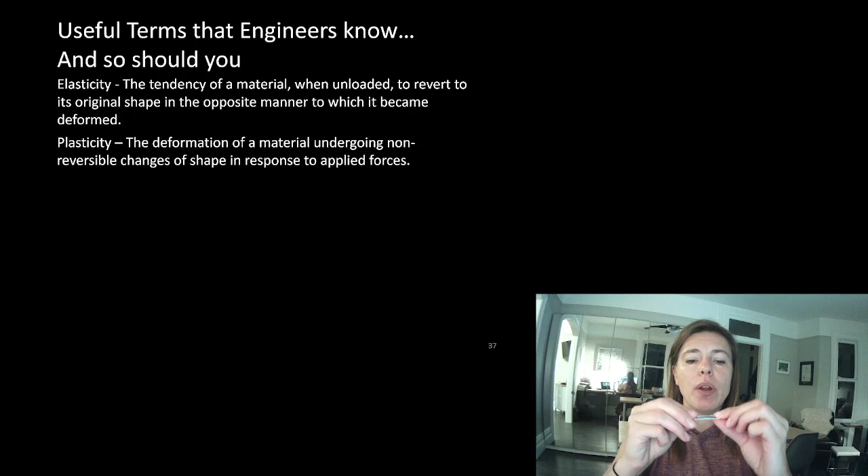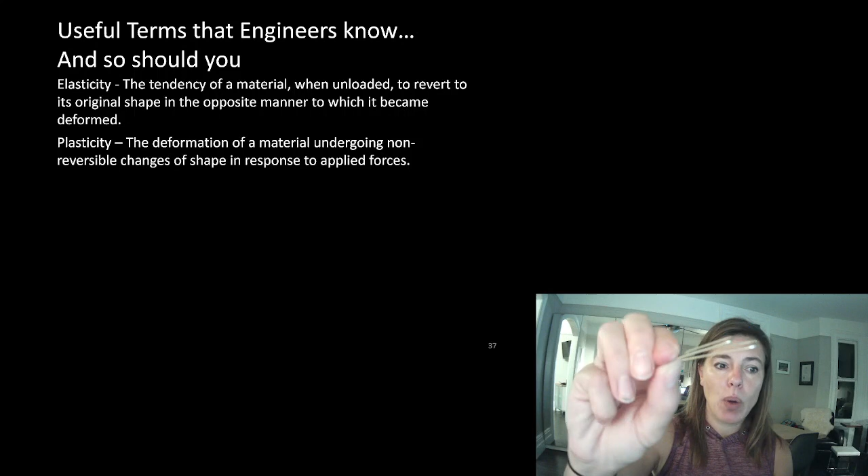If I put a few pieces of paper in here, I've deformed it. When I let go, it goes back to its original shape. If I put too much paper in here, I've got lots of deformation—look at how much strain there is in this. When I let go, it reverted some. Look, it sprung back a tiny bit, but it didn't go back to its original shape. That is permanent or non-reversible change in shape in response to the applied load. But you saw that there was some amount that it did spring back. So there was some elastic component and some plastic component to applying that amount of load to our paperclip.

Yield stress: the point at which a material transitions from elastic behavior to plastic behavior. At this point, some portion of the deformation will be permanent. Now, this only applies to plastic materials. Some materials have no plasticity whatsoever.

Wood has zero plasticity. It's elastic, so you can load it and unload it and it goes back to its original shape. But when you get to the limit where it reaches the maximum point, it fails. There is no zone where you can deform it and it doesn't spring back. It will always spring back or it will fail.

Concrete, same thing. There is an elastic zone in concrete where you can apply load to concrete and it deforms, and when you unload it, it springs back. But after you apply too much load, it doesn't undergo permanent deformation—it will fail completely.

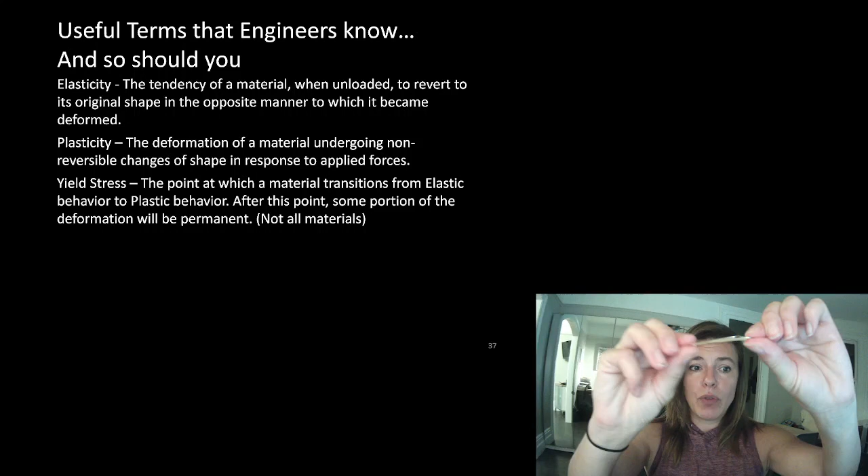Steel has this beautiful plastic zone. I can stretch it, and it springs back, and then I've got permanent deformation. That is a plastic material.

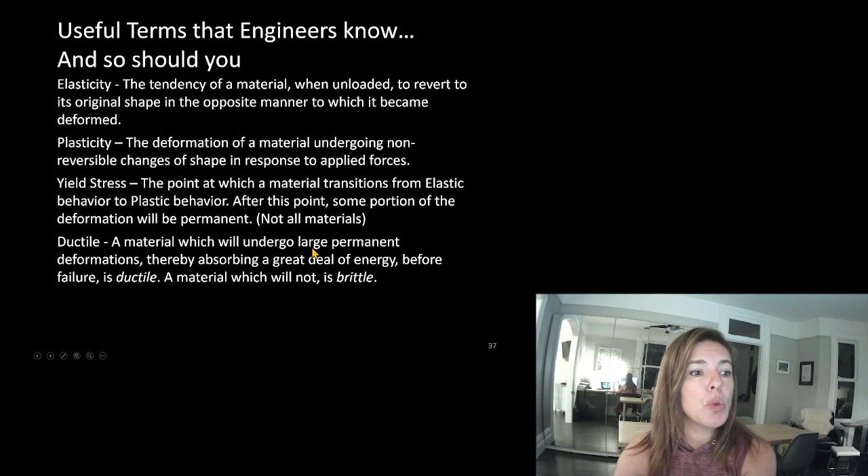Or it's got ductility. Ductility is a really fun way to talk about it. Ductile: a material which will undergo large permanent deformations, thereby absorbing a great deal of energy before failure. A material which has no ductility is brittle, or a material that has no plasticity is brittle. So we could say that our concrete and our wood are brittle materials. Our steel is a ductile material, and one of the great things about that is it can absorb large amounts of energy, which can be really useful for a few things.

It can be helpful for seismic resistance. But another thing is that the large permanent deformations give us a really great indication long before failure occurs. With wood and concrete, we don't know we have a problem until we have a problem. With steel, if we see large scale deformations, we have a good indication that we're approaching failure, and maybe we have time to do something about an imminent failure.

Brittle: a material with no plastic zone. Ultimate stress is the maximum stress that a material can sustain. For brittle materials, that is at the end of the elastic zone. For ductile materials, that is at the end of the plastic zone.

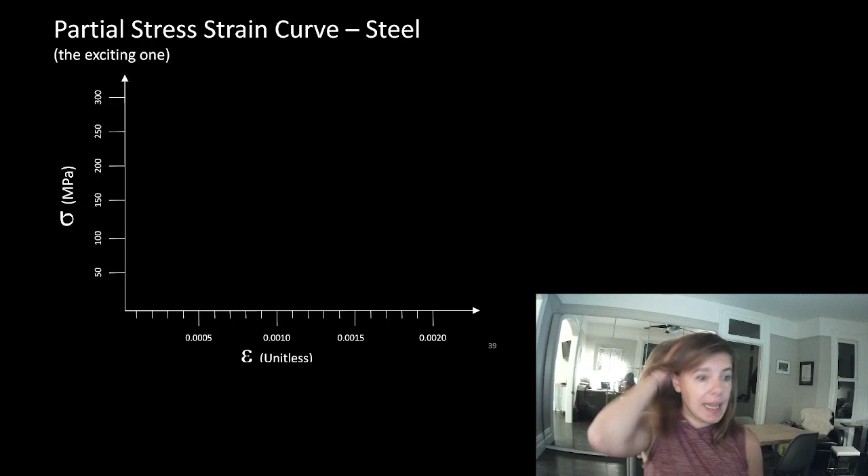All right, let's look at the partial stress strain curve of steel. Steel is the exciting stress strain curve because this really kind of demonstrates all of these things I've been talking about so far in this lecture. The stress strain curve for steel has a huge range in it, and we only care about a wee little tiny portion of it. So I'm going to zoom in on a tiny portion of the stress strain curve of steel right now. The next slide, we're going to go a little bit further.

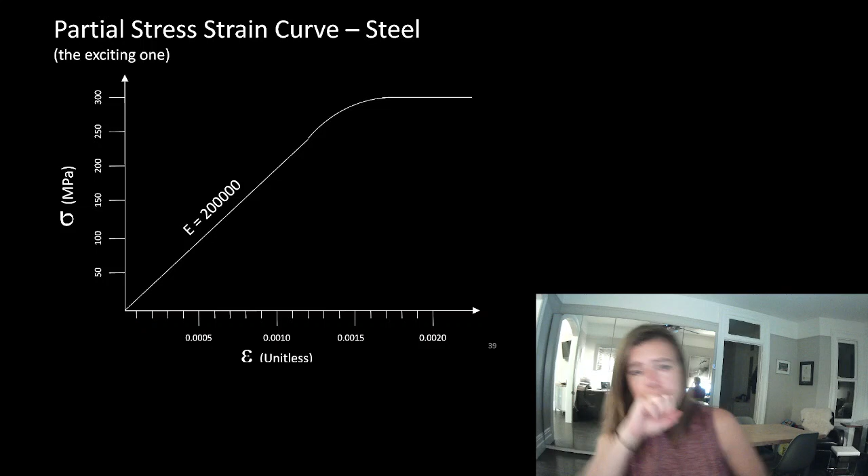So look at this. We have our stress, we have our strain. Somebody has plotted, has tested a little sample, and they've plotted as they increase the stress, they've measured the deformation of it.

This is our nice flat slope, or our E, or our stress divided by our strain, is E, and it's been plotted as 200,000 MPa. So this is the slope of our line here.

This is when it starts to transition from a nice elastic zone to a plastic zone, or we call that yielding. Yielding is when we transition from an elastic to a plastic zone. So if we know what value that is, we know what stress we transition from elastic to plastic. That is when we start to yield.

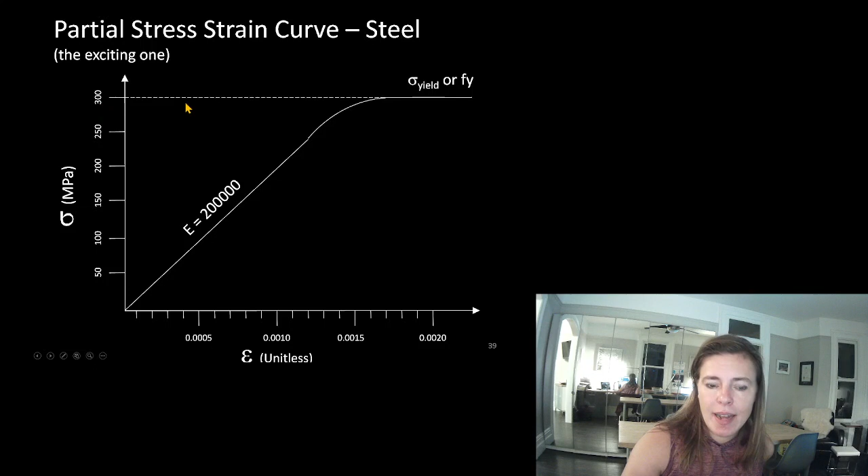So that's why for steel, for example, we call that yield stress Fy. If we know what the yield stress is of steel, because we test it again and again, maybe we can do something handy with that.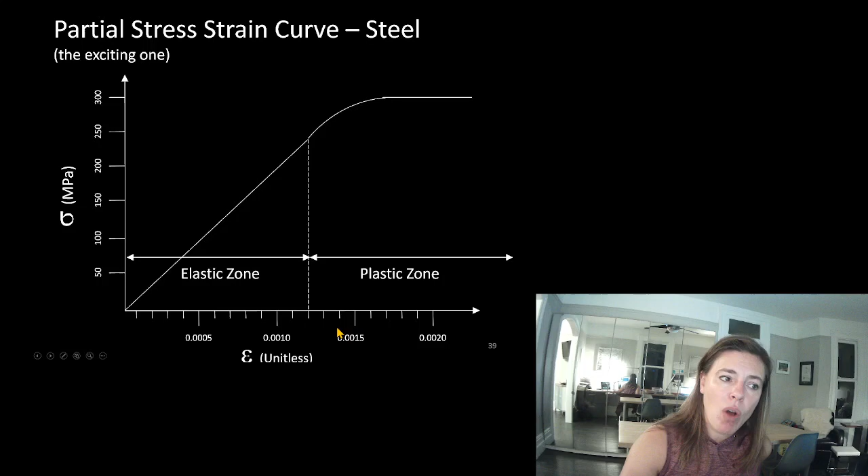That's the proportional limit. After that, we're starting to do some weird things to our steel. In this zone, it's elastic; in this zone, it's plastic. Anywhere in the elastic zone, if we apply a load we'll experience a strain, but if we take the load off, we'll go back to zero strain because there's no permanent deformation. In the plastic zone, if we apply a load we have a strain, and when we unload it, it will revert back some, but not all the way. There will be permanent deformation in this material.

Let's take a look at loading and unloading in an elastic zone. We load our object to this value of stress and this value of strain. When we unload it, there is no permanent deformation. If we load it into the plastic zone, we go all the way up into the plastic zone, and when we unload it, there is permanent deformation. We unload it following that same modulus of elasticity line, so we have some residual strain — there is some permanent deformation.

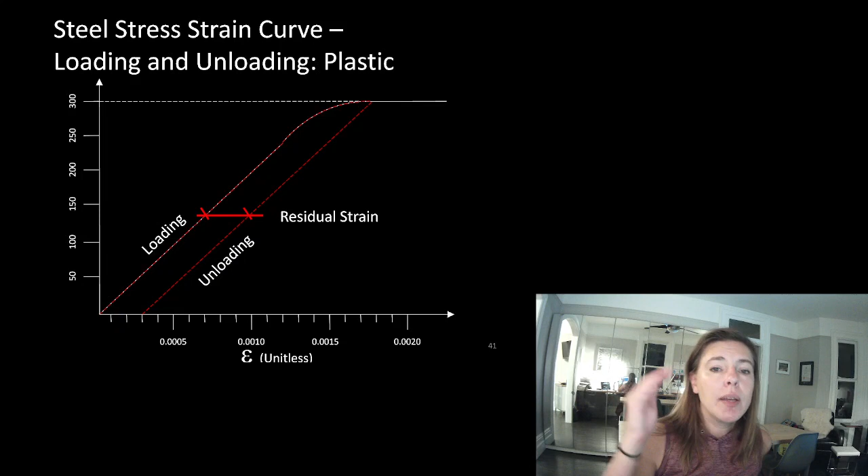So we loaded our paper clip some amount — we've loaded it quite a bit. When I let go, it deforms. It goes back some, but there is some permanent deformation within that paper clip. That permanent deformation is the residual strain, or the deformation that's left even though there's no load applied anymore because we've taken all the load off, but there is some permanent deformation.

We can do it again and again and again, and each time if we go back up to that amount of load that was applied, we can get more residual strain. Or we could just go up and load again and come back down to just that same residual strain.

Okay, let's look at the entirety of the stress strain curve for steel. I'll tell you, this makes a fantastic exam question — maybe if someone printed off the entirety of this and highlighted a few key components of the stress strain curve and asked what each of these components are, and you had to label it. That seems like a lovely exam question, maybe worth 5 points. Here is our elastic zone and just transitioning into the plastic zone — this was the part of the slide we just looked at. You can see it's just a tiny little part of the stress strain curve of steel.

This is the entire curve for steel. There is weird stuff happening here; we're not going to worry about it too much. I want you to recognize that this is what the stress strain curve of steel looks like. This is where it yields. So this is what we care about — right here, where the modulus of elasticity is this line, or the relationship between stress and strain in the elastic zone. This is where our steel starts to yield, or where it transitions from elastic to plastic, or where we transition from non-permanent deformation to permanent deformation.

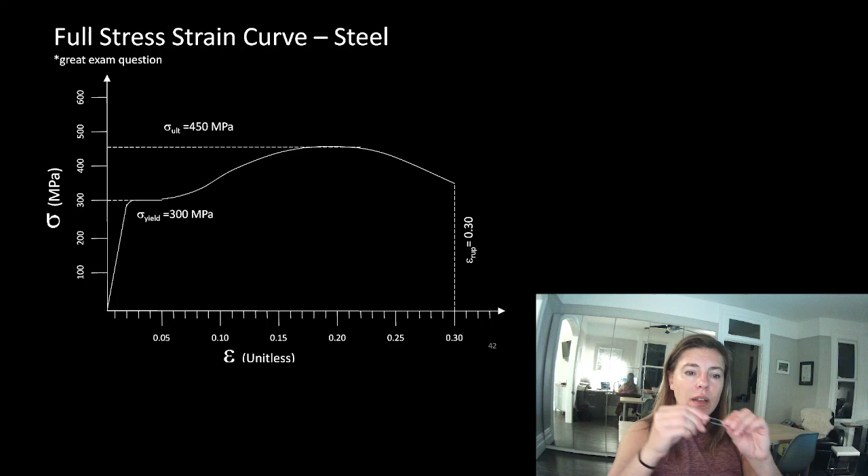This is where I often suggest to people, you can take your paper clip, and we had a little bit of force where we had yielding. So there was some force at yielding, but if you wanted to figure out what rupture was, there was a large amount of deformation in there. If you worked your paper clip back and forth a bunch, doing permanent deformation again and again, you would start to feel that the steel gets a little bit warm. It's because there's lots of energy that goes into that ductility of steel.

If we loaded this object up to this point, if we unloaded it, we know that there is some amount of permanent deformation. We'll unload it following the line of the modulus of elasticity, and this is all residual strain.

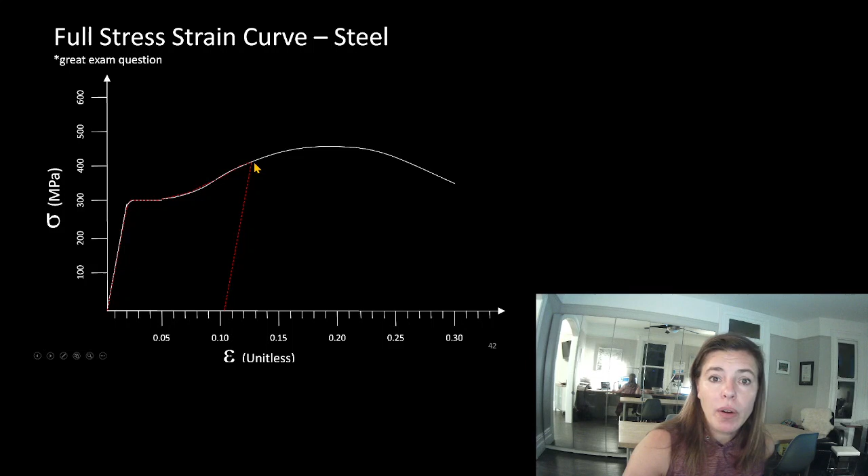So yeah, if we loaded a building up and we saw huge amounts of deformation and we saw that the thing might start to fail, say maybe there's a 1 in 200 year snow event or a hurricane, we get large permanent deformations, but our building hasn't collapsed. When the hurricane stops or the snow melts, yeah, there's going to be lots of permanent deformation, but we didn't have failure.

That was the plastic strain energy. What if, say, there was an earthquake? Well, earthquake puts a lot of force into something. What if we allowed it to be ductile so it could absorb a lot of energy? What if we used that to our advantage?

I've said before that there's not much new. Everything that we're doing in these lectures was figured out 120 years ago. There's nothing new we're talking about. These are all old concepts. Nothing has changed. Very little in the field of engineering is new. Now, I say that kind of flippantly, just the stuff we're talking about, very little is new.

But remember I said earthquake design was kind of a hard one to talk to you about? That's because we have figured out that if we allow large-scale deformation, we can absorb a lot of energy in the building, and maybe it actually lowers the forces that our building sees. So instead of designing for a huge force, if we allow deformation and allow energy to be absorbed locally, we can limit the force that the rest of the building sees.

And that is called ductile design, basically it is a method of design that was implemented around 2004 in the building code. Very rarely needs to be used in Toronto, very important in Ottawa and Vancouver and California, for example, where we see earthquake design. So we're not going to touch on that, don't worry about it, but I want you to understand that capacity design or ductile design uses that idea that energy gets absorbed in large-scale deformation, and it really has a big impact in earthquake design.

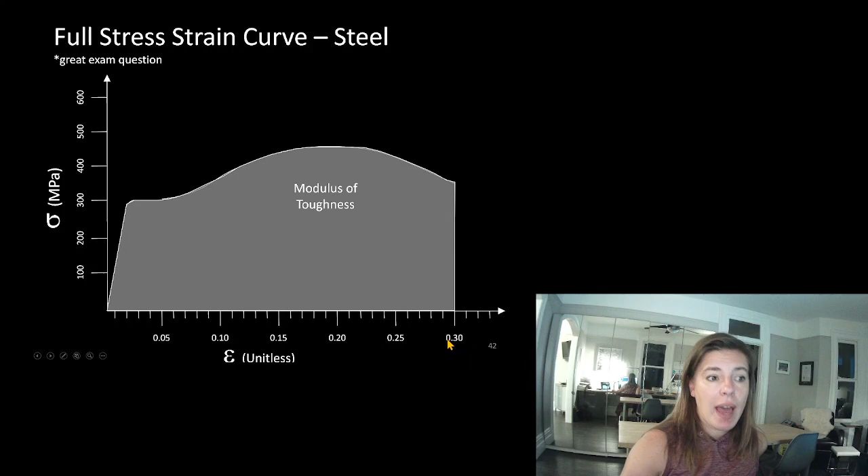Okay, what are some common yield stresses and ultimate stresses of objects? Well, structural steel has 300 or 350 MPa of yield stress. Remember I told you that it had 200,000 MPa for E? Well, we now know its yield stress and we know its ultimate stress. Stainless steel, 250 MPa and 505 MPa for yield and ultimate stresses. I've already told you what its modulus of elasticity is.

Under this, our object doesn't fail. We like to keep objects with yield stresses in the elastic zone quite often because we don't like permanent deformation. Sometimes we like permanent deformation because it tells us when we have a problem, but we don't want everyday objects to experience permanent deformation in the everyday running of a building. So we keep yield stress as the maximum stress we'd let our objects see, and for brittle materials, it's the ultimate stress.

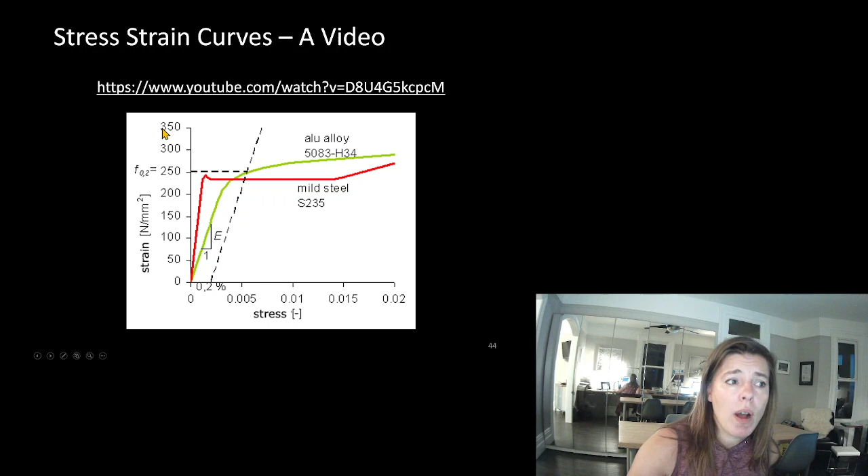Okay, we are not going to spend much time talking about shear stress and strain. I just want you to know it exists. Remember, shear is taking two planes and shifting them relative to each other. Look how this object moves.

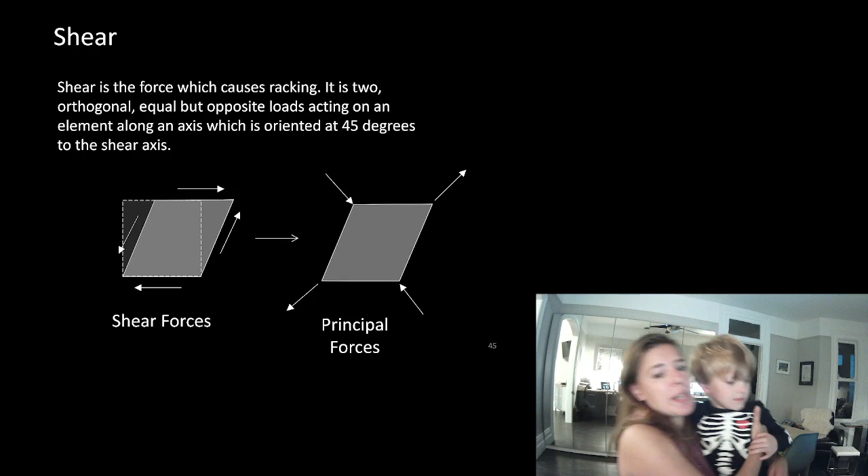Oh, hi buddy, you want to come give me a quick morning hug? Do you want to say hi to all my class? Hi. Be quiet, I think your brother is still asleep. Is he awake or asleep? Awake—he's awake. Oh good, you're both awake. Okay, you go in the other room. Let me say hi... Hi Duncan, can I have a hug? I love that, I'm not all done, I just need a little bit. Sit—oh no, look at the camera. Look this way, say hi everyone. Hi everyone. Anybody right there? I know, but they're gonna watch it. You know how you watch videos on your tablet sometimes? Yeah. They're gonna watch this video like that, they're gonna watch us the way you watch your videos. How? Isn't that cool? Okay listen, you're the cutest. Come on Doug, you go in the other room now. Okay, come on Dougie, all right.

Someone last year complained that it was unprofessional that my kids showed up in the video. I personally think that COVID, man, that's our life. We're trying to work from home, teach from home, you're trying to watch these from home. I'm sure at least one of you has had your cat walk across your computer at this point. So let's try to withhold judgment. Later, some of you might already be parents—I don't get to see you guys, I don't get to talk to you. Some of you are nodding your head and understanding it all right now.

Some of you may choose to understand that later in life. Some of you may not have kids, but hopefully you will find it within you to understand what other people are going through, and I know everybody has a lot going on right now. My thing happens to be that I have small kids at home a lot while trying to work and teach and do all the things that need to be done, make lunches, host Halloween parties, make Halloween costumes, and do all of that stuff.

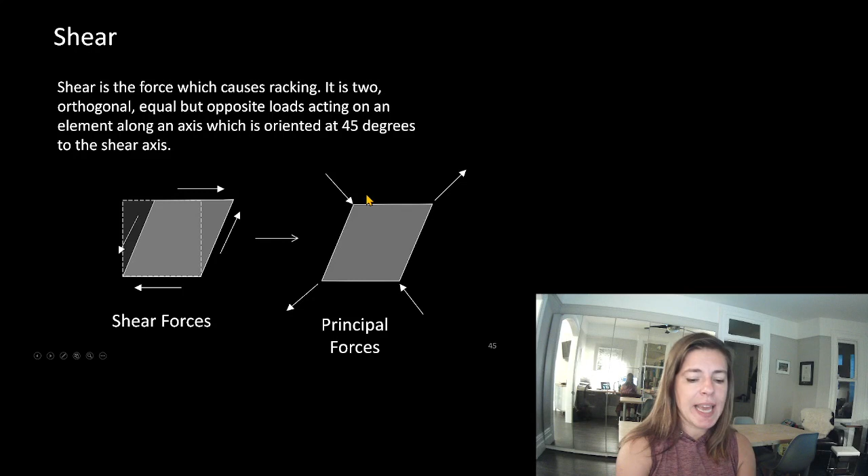Okay, so this one I'm not really going to test you on, but I want you to know it exists. We have these two planes moving relative to each other. We'll look at the way this deforms. It's really kind of the same as saying I am pulling on this side or squishing this side. Look, it moves the exact same. It's the same thing as when I sheared these two sides relative to each other. So really, we're saying shear forces are very similar to principal forces that move like that on a 45-degree axis.

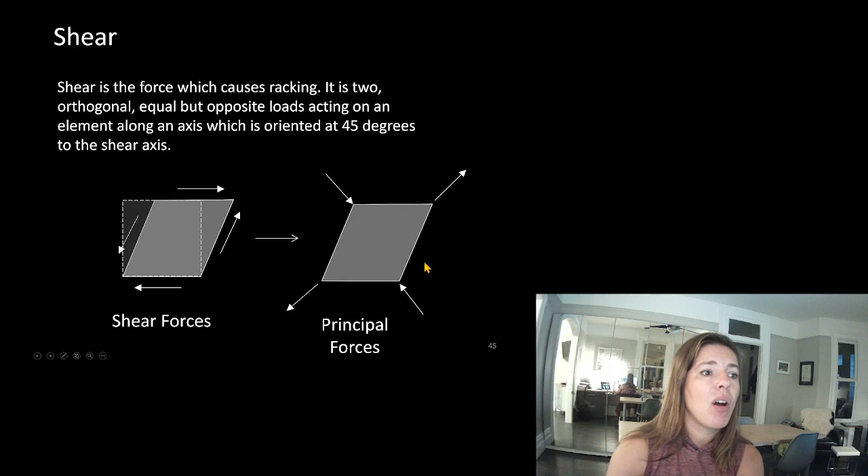Bending is the force that causes tension on one side and compression on the other. So if bending can be related to compression and tension, we can probably still make use of those axial stress-strain curves that told us what the modulus of elasticity was, what the yield stress was, what the ultimate stress was, and what the strain was at those values. So if we know those things exist for axial, and say we knew that the yield stress of steel was 350 MPa, which I told you it is.

If I am bending this object, and we know that deformation or strain is related to stress, you increase the stress, you increase the strain. What parts of this are deforming the most? Look at the little squares on this. They're perfectly the same, and now we're moving it. It looks like the most deformation happens right here. It's squishing here and stretching right here. So the very top and the very bottom are where we're seeing the most axial deformation.

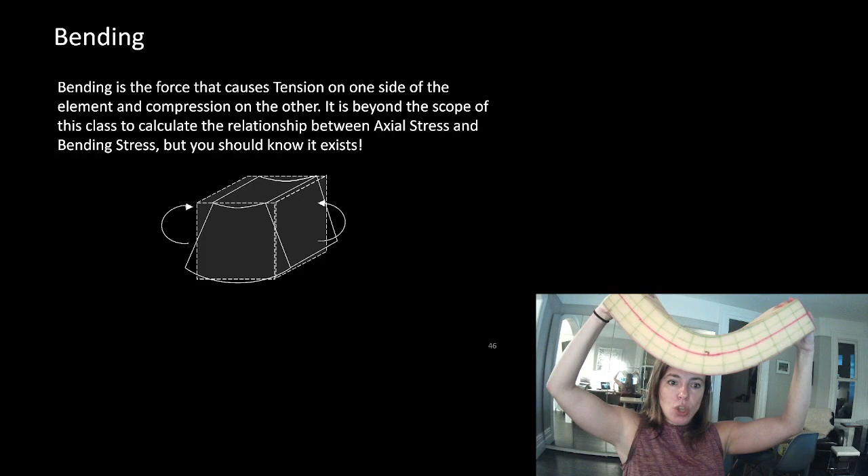Well, we call that the extreme fibers—the top and the bottom are the extreme fibers. So it looks like we would care that the extreme fibers of this in bending don't exceed their maximum stress, or 350 MPa. So we can relate that to tension and compression, and we don't want to exceed the maximum compression and the maximum tension in that object.

So things we won't talk about: the shear stress equation. V is really stress times area. Bending stress equations, where M, or moment, is stress times S, where S is the section modulus. Look at this though—we had an equation for axial where P equaled stress times area. Well, area is about the shape of the object. What if I told you that if you stick around and do the graduate course with me, we'll derive S and find that it is about the shape of the object.

So really, if we know the shape of our object and we know the maximum stress something can see, we could figure out the maximum moment. If we know the shape of the object and the maximum stress that material can see, we can figure out the maximum shear it can take. And we've already seen that if we know the shape of the object and the maximum stress it can see, we can figure out the maximum force that object can take. Which, remember, is what we care about—we want to make sure that maximum force an object can take is greater than the actual force it takes.

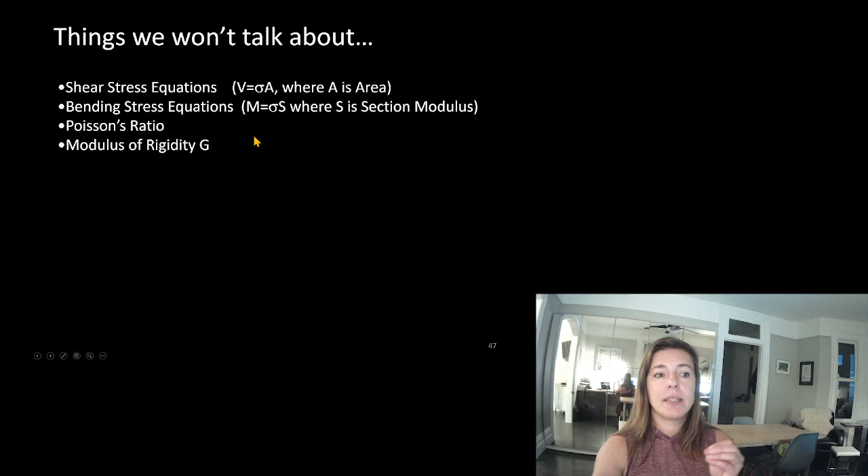So that's all we're going to talk about today. Going forward in the next few weeks, we're going to start to look at the stress and strain of each material and see what that does for us—how can we put that into something? I am giving you these equations for shear and moment, and we've already talked about axial loads. We're going to start to figure out what those maximum forces our different materials can see or experience for different shapes of objects, and so we're getting so close to having actual answers and knowing does this object work, does this object work for this applied load. And knowing what the extreme fibers see starts to be really important.